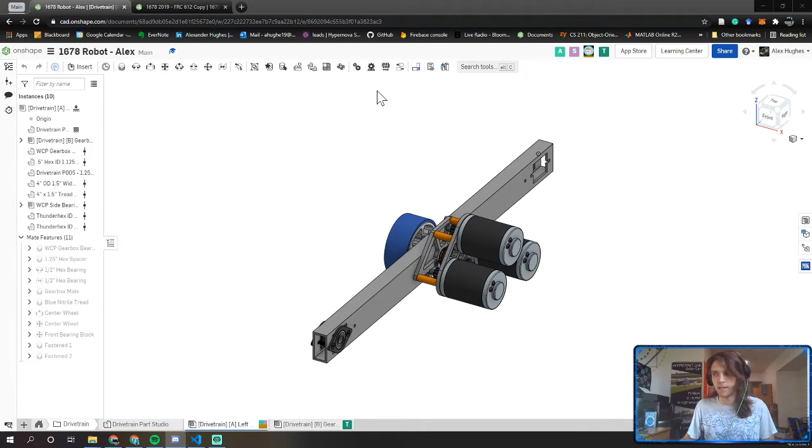Yesterday all we did was we put on a 4-inch wheel from CAD. It was specifically the AndyMark 4175 wheel, and we just fit that onto the end of the gearbox shaft, and then we shortened the shaft until it was almost flush. We gave it, I think, 5/1000 of an inch tolerance.

So we added the wheel, we shortened the shaft, and then we grabbed one of the West Coast Products side bearing blocks from CAD, and we inserted that into one of the slots that we made on the bar previously. So this is now, I think, the fifth meeting or so, fourth or fifth.

Hopefully by this point, you all are kind of getting into the vibe of how FIRST robots are CAD'd. Just inserting and mating, that's the majority of it. So I'm going to start moving slightly faster.

My goal today is for us to get this drive rail completely finished with all the wheels and sensors and everything. I want to get to this point basically. I want to have everything except for the belly pan components and the bumpers.

Save that for next time, but I really want to have the drivetrain fully laid out within the next hour, 30 minutes, and then we'll talk a little bit about what we want to do going forward, because obviously we'll finish this robot up over the next couple weeks, but then I want to talk about other plans, things that we could work on over the summer and possibly into the fall. But we'll save that for the end of the meeting.

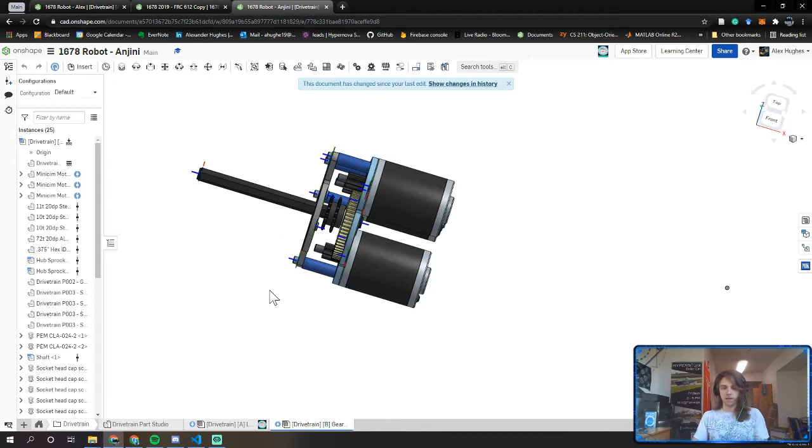Okay, turn off those icons by hitting K on my keyboard. So I'm going to check interference, include standard content. So you're going to get several interferences. The interference with the PEM nuts, those are expected. Interference with the bolts, those are trivial.

So you're getting an interference with the top of one of your bolts here. And you're getting an interference with your shaft, and that's one of the issues we troubleshooted last time. That took a little while. But let's go ahead and figure out what's going on here with these bolts. So it looks like to me, I see the issue.

So we used the 72 tooth pocketed gear. The pocketed gear is wider on the outside and then gets thinner on the inside. You're using just a standard flat gear.

So what you need to do is you need to go into CAD, pull up a pocketed 72 tooth gear, which sadly do not come in steel varieties. You have to pull down. You want, here it is, 72 tooth 20 DP aluminum half-inch hex bore pocketed gear, or WCP-0123. That is the part number. And you'll want to switch that around. And then once that is in, that should fix most of your interferences.

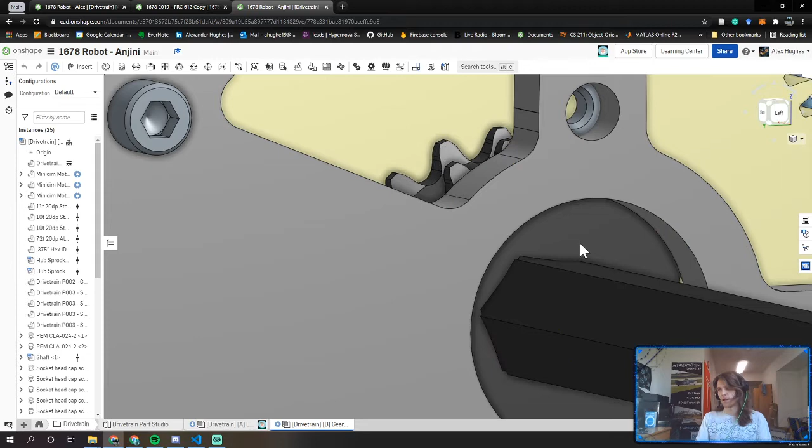But what I would recommend doing is fixing some of your mates, like say the mates where all of these parts fit onto the shaft. You'll want to mate them so they always face the same part of the shaft.

So what you could do is, this is obviously like a revolute mate, but you could do a revolute mate and then also do a parallel mate between one of the flat sides of your sprocket, the inside of your sprocket, with the flat side of your shaft, and that would keep those two parts strongly together. So your shaft and your gears would always rotate as one.

But again, it's a trivial error because it doesn't pop up in real life. It only pops up in CAD. And if you have other errors, we could fix them later. Other questions?

When the document says that there are newer versions of linked documents available, do we need to do anything about that? It's typically best to just update all of your instances to the latest version. So you'll see a refresh icon in your upper left, right by the insert icon. If you just hit that, you can update all of your documents. It almost never will interfere with anything. It just kind of gets rid of those annoying update icons that appear.

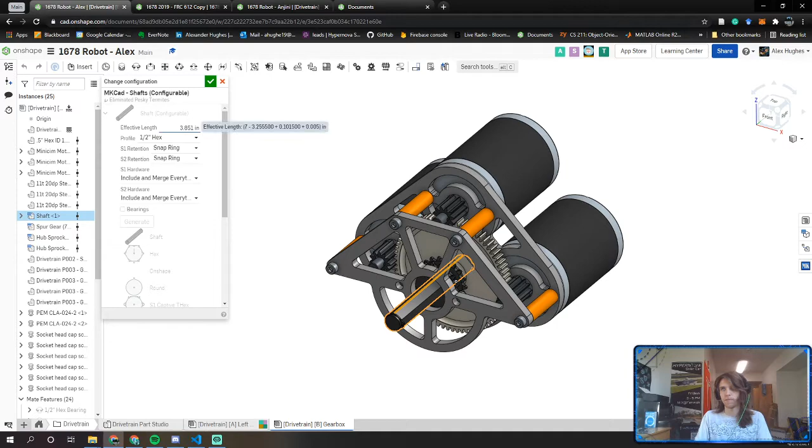Okay, cool. So yeah, unless there's any other questions, we will go ahead and get started with adding the front wheels. I'm just gonna hide some of this stuff.

Were the bearing blocks annoying for any other people with the interferences, or was it supposed to be like that? No, it was me too. Okay. Wait, were you all having troubles with the bearing blocks getting them together, or not? No, the screws are just annoying.

Yeah, so it comes with special screws, which is slightly frustrating. It doesn't necessarily come with the ones that you can pull up in standard content. So yeah, I don't know why the ones I pulled up came pre-assembled in MKCAD. That just might be me having the advantage of having the app with more updated things that might be on the ones you're using.

If you search it up, you can find the fully assembled bearing block. That's what I did. I can also just go to your document and pull up the linked document to that exact one. Oh yeah, I forgot about that. If you just want to pull it off of my assembly, feel free.

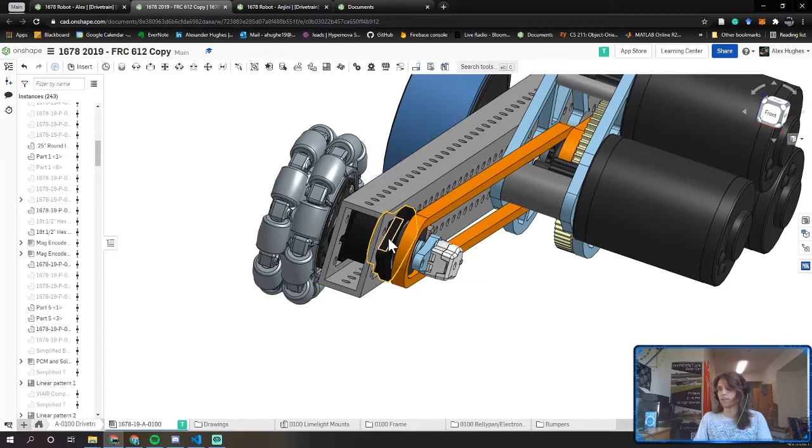So first thing that we need to do is we need to add a shaft. I talked about this last time, but what we're going to do for this front one is add a Thunderhex shaft. So we need to go into MKCAD, find where the shafts are, shafts configurable, and go to hex/Thunderhex. When I choose the 1/2 inch, we want to hit the check mark on Thunderhex, and let's insert a random length of, let's say, 5 inches. So: MKCAD, shafts configurable, add a 1/2 inch Thunderhex, 5 inch length piece of hex shaft.

Actually, that might not be the best thing to do. How did we do this, trying to remember... oh yeah, okay. I lied, don't add in the hex/thunderhex. We want to just go to shafts configurable because that will allow us to add in the automatic retention methods, which is the exact same thing we did on the gearbox.

So if we use the standard shafts configurable, we want to choose a 1/2 inch hex profile. We're going to say the effective length will be 5 inches. We're going to do snap rings for both of them, include and merge everything. We're not going to bother adding the bearings, and we're just going to insert. That's going to give us a shaft basically identical to the one that we used on the gearbox, other than this is a thunderhex profile, while the gearbox shaft was a standard hex profile.

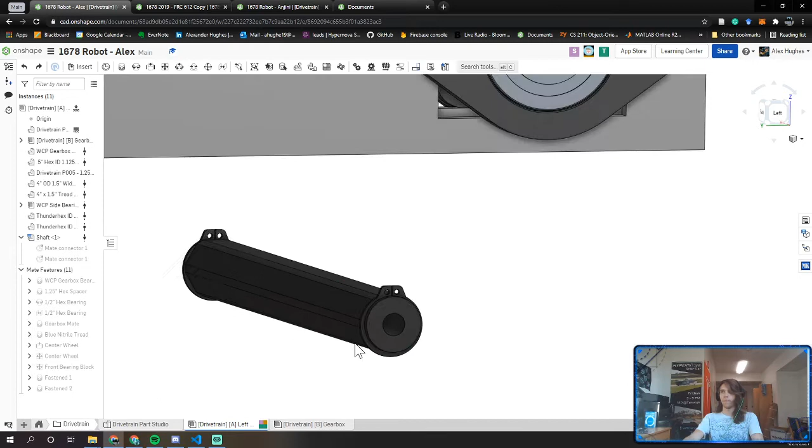But basically, the difference between a thunderhex shaft and a regular hex shaft is a thunderhex shaft is a hex shaft, but its corners are rounded. And the corners of the hex are rounded in such a way that it allows it to fit into a circular bearing called a thunderhex bearing. So we can insert this piece of thunderhex shaft into a round bearing, which means we can insert it in any orientation.

The advantage of that is you do not have to go through the painstaking process of trying to insert a hex-shaped profile through two hex bearings, which if you've ever tried replacing a piece of hex shaft on a robot and had to go through multiple hex bearings, it can be quite a pain to do, especially if your robot's already assembled and you have a bunch of stuff in your way. So thunderhex shafts just kind of make things easier.

They also come drilled out, so you could tap the ends to a quarter-20 or quarter-28 tap, and thread things into the end, which is a useful feature. That's how I typically do retainment - we'll just tap the ends and add a bolt and a washer. But snap rings are a little bit cleaner.

So we have our hex shaft. Sorry, I need to rename these mate features quickly. Those are the thunder hex bearings that we added last time. Bearings.

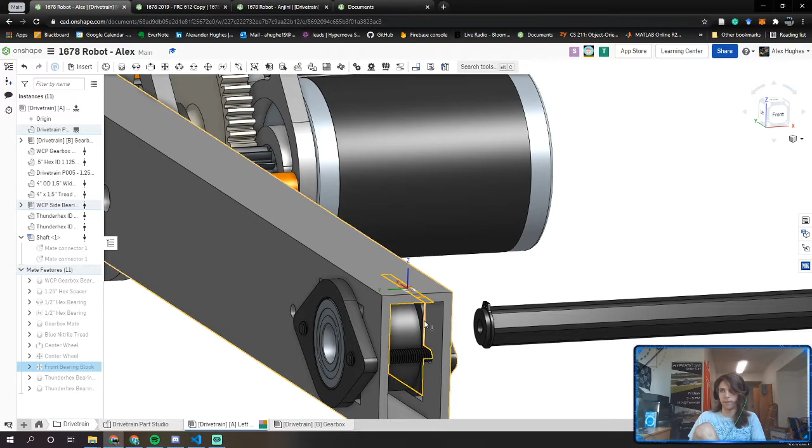Alex, which parts of the side bearing block did you mate to the left drive rail? So what I did is I did a planar mate - I took the top face of, I'll make this transparent quickly, the inner square on one of the sides of the bearing block, and did a parallel mate to the top face of the cutout that we made. Then with that parallel mate, you just have to make it so it can only go left and right by about a tenth of an inch in each direction, and everything else should be zero. Okay, thanks.

Okay, so we have the hex shaft. Let us go ahead and drop in our wheel. Just go ahead and get everything that we need. So we have our hex shaft. Let's go back into MKCAD, and we're going to find a 4-inch Omni wheel. Hopefully something that comes completely pre-assembled.

So in MKCAD, verify - they use the 4-inch Vex Pro Omni wheels, which have a part number of 217-2584. So I'm looking for 2584 here in MKCAD. Great, if I could find that. Omni wheel - it's there if you search for it. It might be easier to just search. 217-2584.

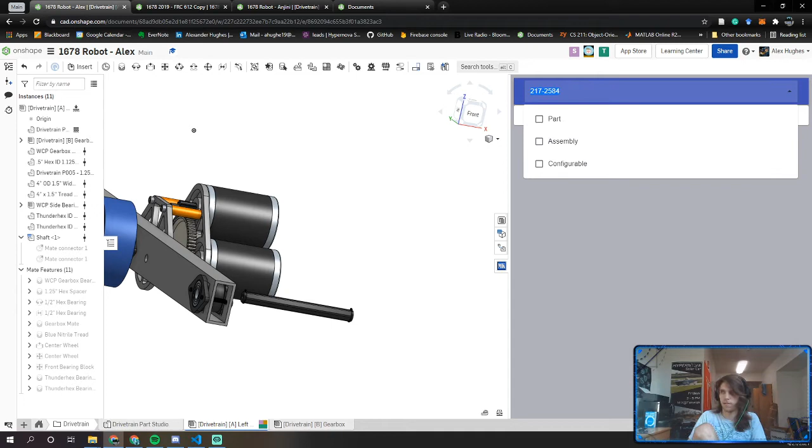Parts, might be in... I don't know. Gonna search that. No, apparently the Onshape, whatever - this app still apparently has glitches. I could find it quickly, manually. Can't. Being blind.

It's called deprecated 4-inch Vex Pro. Oh, it's one of the deprecated ones. Might not have that in my little app here. Okay, well I'm gonna just search for it using the old MKCAD, the one you all are using. Wheels, 217-2584. Yep, okay, here we go. So deprecated just means there's a newer version out there - slight improvements, so VexPro can sell you more stuff.

So we're gonna take that, drop that down. It does not come fully assembled, which is slightly annoying. What we're gonna need is we're gonna need two - the heck, yeah, we typically need two hubs, but looks like Team 1678 only uses a single hub.

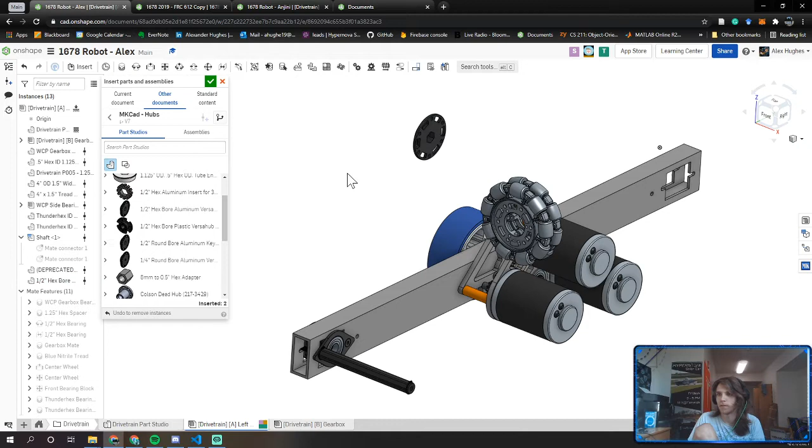There's a separate folder for hubs. Oh, really? I must have completely forgot about that. Here we are, you are right. MKCAD hubs - we want to add in the half-inch aluminum hex bore Versa hub, which is part number 2592. Some of you all might remember these from Rosie - we had to use these on Rosie's wheels, and I really did not like them.

But such is that. So these simply mate onto - I'll kind of demonstrate this here. What you'll do is the hubs just kind of interlock with the little... go. Well, if I get the orientation right, hubs will interlock with these little rectangular-ish parts, and then you run screws all the way through, and bolt it to the other side. So it takes a circular hub inside the wheel and turns that into a hex shaft, or hex profile, so you can run a hex shaft through it.

So we need one Omni wheel, we need one half-inch hex hub, we need one piece of Thunderhex with shaft retention. What else do we need? Well, we're going to need a sprocket. So what is this? This is an 18-tooth, half-inch hex bore, 25-chain sprocket. So we are looking for Vex number 3488. Go ahead and pull that up.

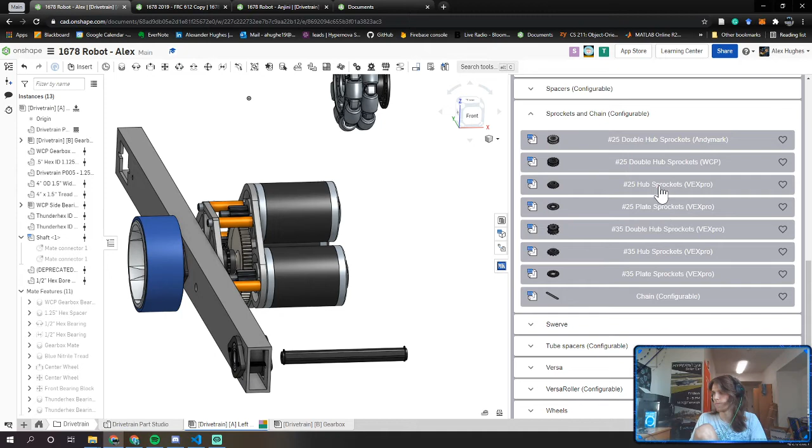Have to go down to sprockets and chain. I will choose the configurable hub sprocket - that just makes my life easier. Half-inch hex bore, 18 teeth. And that's that, I'll drag that over here. Spin it in. Which one did you select?

Sorry, what was that? The option that you just did for the sprocket. I'll drop them in chat, but it was 18-tooth, half-inch hex bore, number 25 hub sprocket. It was part number 217-3488.

And then finally, we have what looks like a mag encoder. Yeah, mag encoder with magnet. They have a mag encoder with some sort of special adapter for it. So let's see if we can figure out that. I should have spent the time figuring out how that works, but I just haven't.

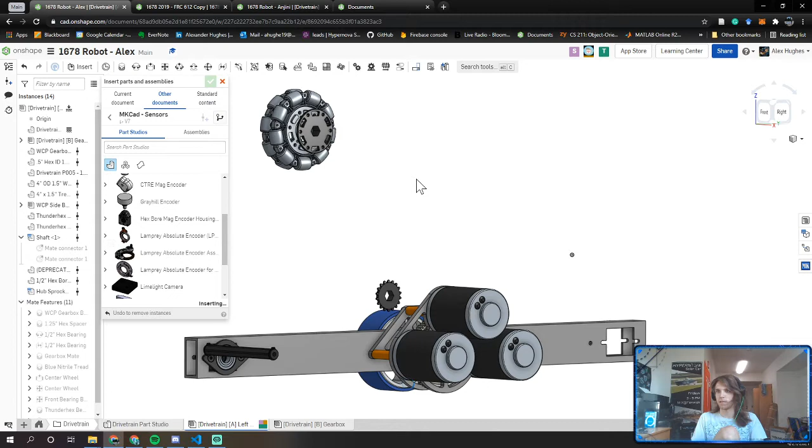This app sucks. It doesn't have sensors. Other documents, MKCAD. Going down to sensors. Here we are. To the mag encoder. Grayhill. Yo, that's pretty neat. That might be useful. CTRE mag encoder. That's what I want.

This looks interesting. This thing I've never seen before. Oh no, it's not an assembly. It just comes apart. That's awful. This looks like an all-in-one solution, so you don't have to do what 1678 did here and mount your own little machined bracket thing. We might not even bother with a mag encoder because they clearly left out some CAD details that I don't want to bother to figure out right now.

Does that just count wheel rotations? Yes, exactly. This will tell you how far your robot realistically moves. This is in comparison to putting your encoder on your gearbox, which a lot of teams do instead. But it's clear that 1678 did not design their encoder in there. And it's also kind of better to put your encoder further down the line because it gives you a more

accurate measurement. I'm just going to delete the encoder for right now because I don't want to worry about that. We could go back in and add that later. Let's get the important stuff out of the way first. Okay, so we have four things. We have the hub, we have the wheel, we have the sprocket, and we have the axle.

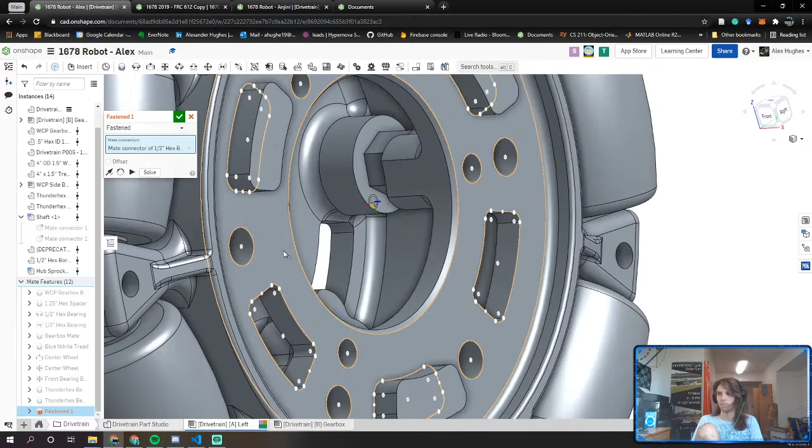So the first thing I'm going to do is mate the hub into the wheel. The way I'm going to do that is a simple fasten mate from the face of this hub into the face of the wheel. And you might want to go into the offset here and change the rotation angle around Z. For some reason, it defaults to rotate around X, though I've never used that. I've always rotated around Z.

I'm just going to change the rotation angle until it matches up with these little squiggly rectangles on the wheel. I'm gonna do 30, 35 degrees. I'm just gonna try and hone that in. 40 degrees. So for me, it's about 40 degrees to get those rectangles to fit inside the hub, which is realistically how it would work. So I'm going to name this half-inch hex Versa hub. And that's precisely how your hub fits on.

Then I don't know if these things are actually threaded all the way through. Let me actually look that up. 217-2592 hub, Versa hub. Because you might just be able, no, those are smooth. So those are through holes. They are,

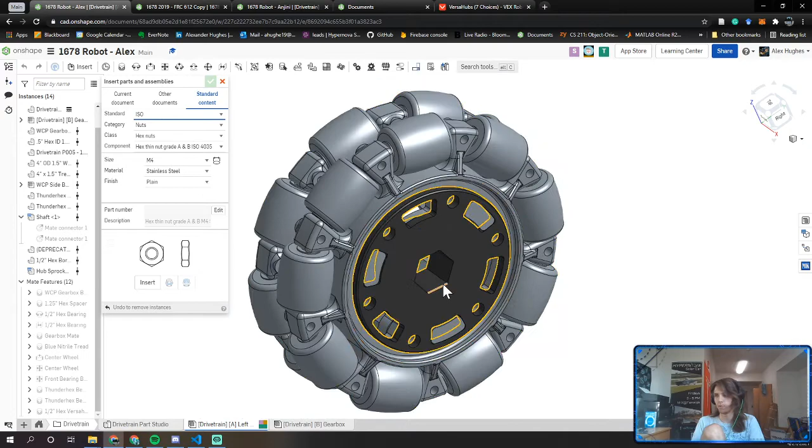So I want to grab a few bolts and run bolts across this thing. So I will need some bolts that are at least 1¼ inch long. So I'm going to go into standard content. I'm going to grab some number 8. Let's do number 8-32 because that's pretty standard. What type of bolt do I want? Let us do a round head. No, not round head. We just machine. Hex head machine screw? No.

Screw it. We'll just do socket head cap screw. Kind of the standard. Actually, yeah, socket head cap screw with the button head screw type. My personal favorite type of screw. So we want to do a number 8-32. Also, that doesn't matter. You can use whatever screw you want. We're going to choose the 1.25 inch length. I'm just going to drop 3.

And in case you didn't know, if you just click on the parts where you want the mate to occur, so if I just click on 3 of these outer circles and I hit insert, it should automatically insert those screws all the way through. Oh, it did it, but it did it the wrong way, which is ever so slightly annoying. I need to go in here and flip all of these by hitting the flip primary axis, and I'm also just going to name them number 8-32 1.25 inch, just so I could keep track of what mates where.

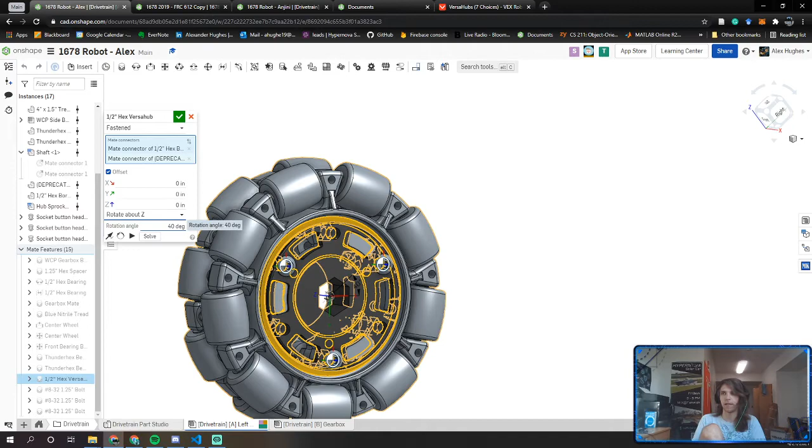How did you exactly align the Omni wheels' face with, I forgot the part name, with the black part? The hub? Yeah. So in the mate itself, you have to go to offset. You have to hit the little offset square, and then you change your rotation to rotate about Z. And then I just kind of incremented that angle until it finally fit. For me, it was 40 degrees. It might be the same for all of you.

Okay, so we have our bolts through, and obviously whenever you have bolts, you need nuts. So we are going to go into ANSI inch. What type of nuts do I want? Let's just do standard hex nuts. I'm not going to bother too much right now with it. 8-32, obviously, and we want to click on the little edges where we want those nuts to go. Holy crap, those are huge. Why did it do that? For some reason it inserted 7/16, so I want to edit my standard configuration, fix that.

Oh, that's interesting. For some reason I can't choose those type of nuts. Let's try that again. Round 2. Hex nut, hex nut. Okay, apparently they don't allow hex nuts to go that small. Maybe machine screw nuts. 8-32. Okay, here we go. Click on those 3 circles where I want this to be inserted. These are a little overkill. Kind of annoys me how big they are, but they look good enough.

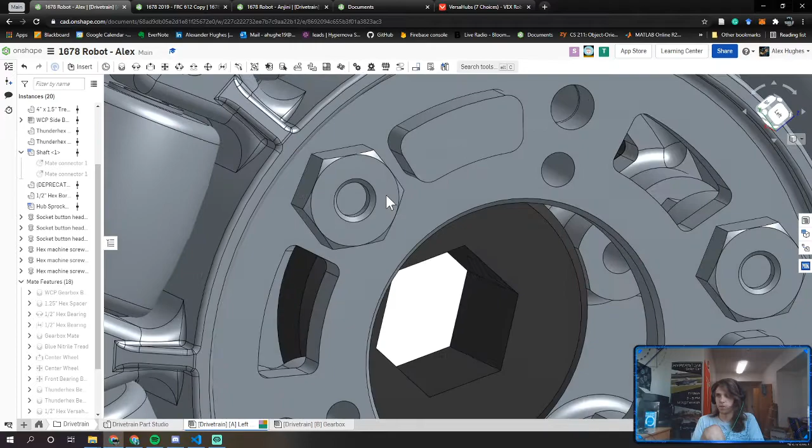Now, realistically, you don't actually get much grip on these. As you notice, the bolt actually doesn't come all the way out to the other side. So I might actually consider increasing the length of these bolts ever so slightly. Whatever the next size up is, 1.375, so 1/8 of an inch longer. That's just going to give them a little more grip so your wheel doesn't come flying apart. And then I'm going to rename those fasten mates, which are 8-32 hex nuts. Again, so I can keep track of everything. Okay, cool. Any questions about assembling this wheel?

What did you end up making the nut properties to be? It doesn't really matter, but let us see specifically what the configuration was. As long as the size is the same as the screw you used, so 8-32, and then I just chose machine screw nuts, and I chose the hex machine screw nut.

So I just came in. Sorry if I'm a little late, but I haven't really gotten to do the Onshape certification course yet. Do you want me to leave this meeting right now and just go do the certification course and get that done as soon as possible? No, if you want to stay here and actually do this CAD with us, you can. Just know that I can't slow down to cover certain topics that might be covered in the CAD certification course. If you feel comfortable with what we've done so far, feel free to. But if you are very confused, it might be best to go work on that. But stay if you want.

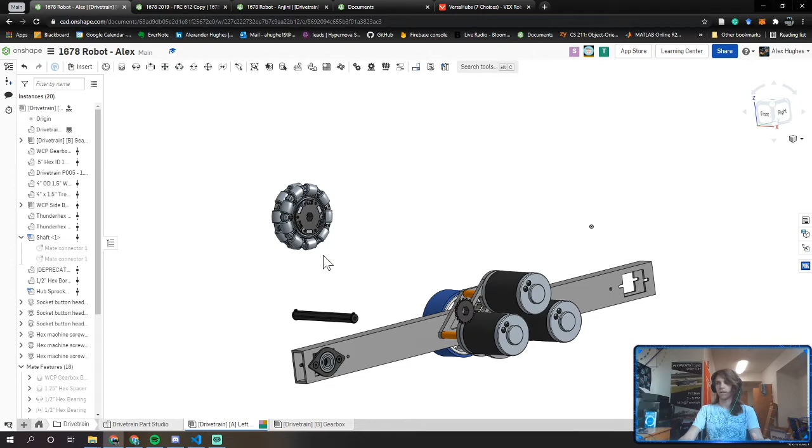All right. So one quick thing I'm going to do is, for the sake of keeping instances and assemblies clean, one of the things I mentioned in my very first presentation was you should never really have more than 25 instances per assembly. We're about halfway through, but we're already at 20 instances. And so this wheel has 8 parts to it, but it's just a simple wheel.

So for the sake of keeping everything clean and making our lives easier, I'm going to highlight everything that we just made for this wheel. If you right click on all of that in your feature list and hit move to new subassembly, in your main document it will create a brand new assembly called assembly 1. And I could drop that assembly into my drivetrain folder and rename it. So this would be a drivetrain level assembly. It is currently one assembly lower than the left drive rail, which is an A level assembly, so this would be a B level assembly. And I'm going to call this 4-inch Omni wheel.

Now if I go back to my original assembly, my left drive rail, instead of having 20 instances, now I only have 13. One of which is now an assembly that contains 8 instances inside of it and all of those features. So it just keeps everything nice and clean.

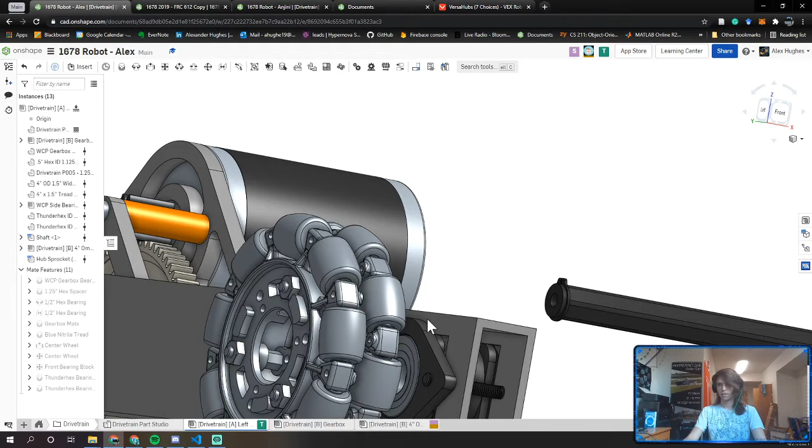And so next what I want to do is, give me a second, I'm trying to figure out something. I really wonder if they just didn't add a hub on the other side. This annoys me because I've never seen a team do this, but it might be. You don't really need to support the shaft on the other side. You just have to worry about it possibly sliding, but it really shouldn't. I'm just going to copy what 1678 has in their CAD for right now.

So what I want to do now is I want to have this hex shaft go into the hex hub that we have here. The way I'm going to do that is I'm going to do a 2-step mate again. The first thing I'm going to do, I'm going to do a slider mate, because this hex shaft should theoretically be able to move around inside of this hub. It should be able to slide back and forth along the hub, and it should also be able to rotate with the wheel.

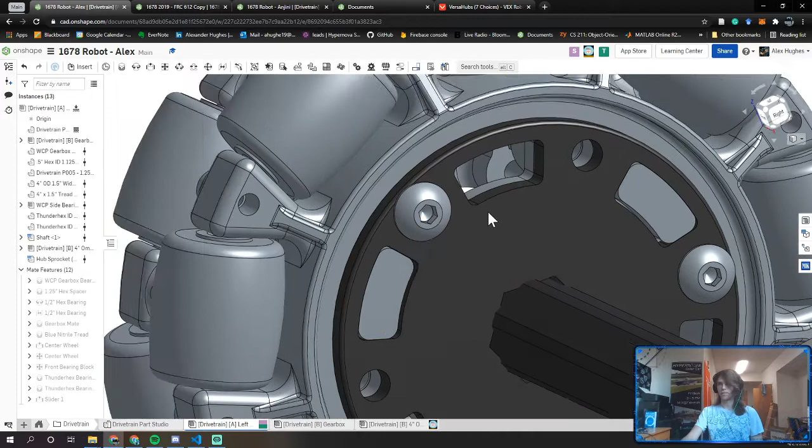So I'm going to do a slider mate there, and then in order to get the wheel and the shaft to line up, because currently, as you can see, you have interferences between the two, I am going to do a second set of mates, a parallel mate. A parallel mate between one of the flat planes on the piece of Thunderhex and one of the flat planes inside of the Hex Hub.

So what that means now is if I, say, fix the wheel in place, the shaft now doesn't spin with respect to the hub. It can only slide back and forth, which is very useful for us. Because now whenever I do interference checks, you do not have any issues with that, as we saw with Anjini's and lots of other people's issues previously.

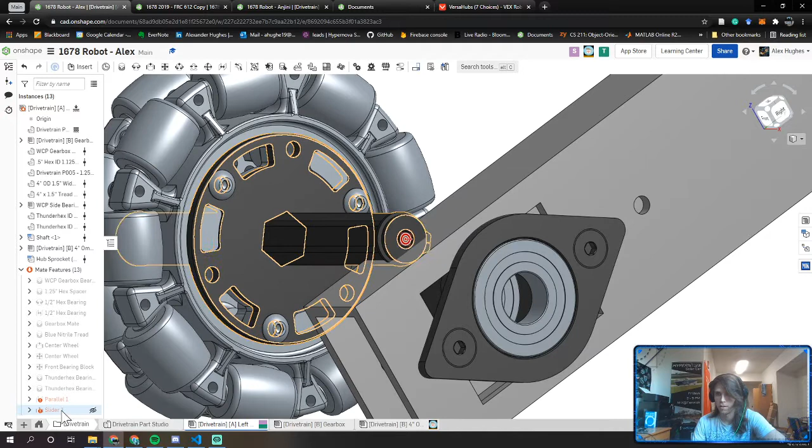Giving me an error. Figure out why. A second. Why are you giving me an error? Shouldn't be. Yeah, I've rearranged the order of these. Oh, yeah. I should have been doing a cylindrical mate. That is my bad. I'm still learning Onshape mates. I don't use those quite frequently.

Frequently enough, at least. Okay, so now that it's oriented correctly, the issue that I was having is a slider mate only has 1 degree of freedom, which is that one axis that is able to move along. And so I was doing a slider mate, and then I was telling it that it needs to rotate in order to be parallel with another surface. And it did not like that because I was telling it to rotate in a degree of freedom that the slider mate already defined.

So if you do the parallel mate first, so you get them to line up, and then you add in your slider mate, everything's fine. But if you do them out of order, you could get an error. If that makes sense. It does, it might not. I don't know if I'm making sense when I give these CAD lectures. Questions? Anyone?

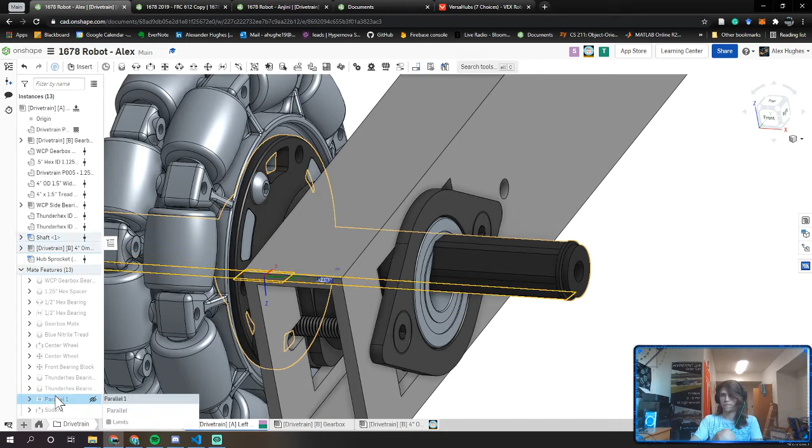Cool, and we'll continue. So we have our hex shaft mated onto our wheel. So now we need to mate the hex shaft into our bearing block. And I'm going to do that using a single cylindrical mate. Well, first off, actually I need to rename those mates that I just made. I'm going to rename the parallel to be front axle, slider, same thing.

I am going to add now a cylindrical mate, the end of one of the shaft to the center of the bearing. That should give me plenty of degrees of freedom. Yes, that gives me plenty of degrees of freedom, but it keeps it anchored where I want it to.

I just realized I named these wrong. This should actually be front wheel. The two mates we just did should be front wheel, and this mate that we just did should be front axle, if I'm keeping with a consistent naming convention.

I really should standardize how I name sketches and, not assemblies, we've standardized assembly naming, but mates and whatnot. That might make everything a whole lot clearer. Doesn't matter too much right now. So we have everything approximately how we want it. As you could see, if you kind of move everything around, you should be able to get a bunch of play in your system. That will become more clearly defined here in a minute.

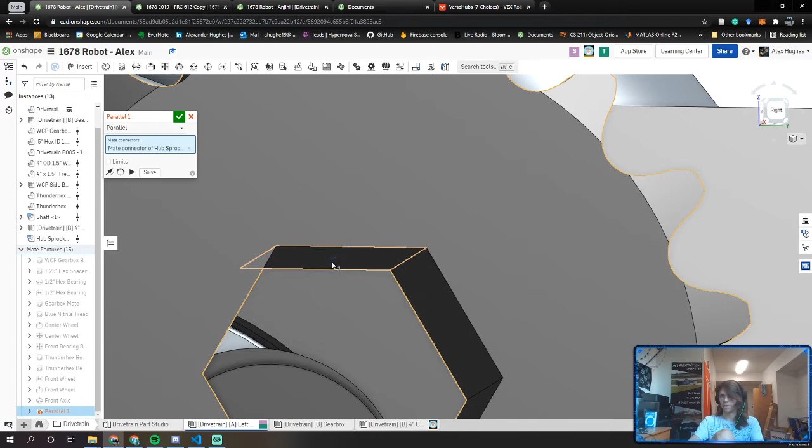So what I'm going to do now, we'll see if this works, but I'm going to do a two-part mate again, putting the sprocket onto the shaft. I'm going to do exactly what I did with the wheel. I'm going to start off with a parallel mate. I'm going to make one of these flat inside edges of the sprocket parallel to one of the flat surfaces of the hex shaft. I'm going to just rename that 18-tooth sprocket. Pull that guy out here.

So now that I have both of those parallel, I can then do a revolute mate. I want to do a revolute mate and push this all the way up against the bearing. The end of the sprocket should be touching the bearing. Sprocket. And now if I rotate all of these, they should all rotate together. Which, as we see, everything's kind of rotating as one, as it should be. Cool.

So if we did our math right, and I think we did, this sprocket should be perfectly in line with this sprocket on our gearbox, and that's because of that spacer we made previously. 1678 did that math for us. But now if I look at it from a front view, I can actually notice that the sprockets aren't perfectly aligned. There is a little bit of an offset between the two. Let me see if 1678 has that. No, theirs actually seem to be perfect. So there's an error somewhere in our assembly, but it's nothing we can't fix.

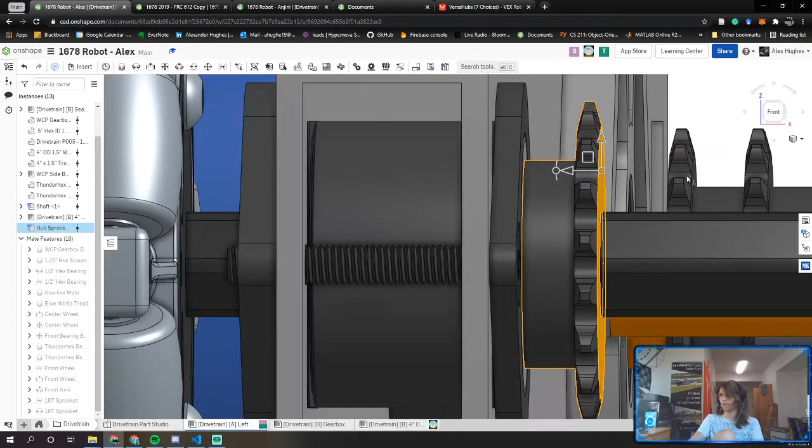So let's quantify how much these are offset by. I look at the outer face and, say, this face. So we are off by 0.062 inches, which is almost exactly 1/16 of an inch. So that makes me wonder if I added in a spacer somewhere that I shouldn't have. Check a few things quickly.

Troubleshooting in CAD is something that you will become very familiar with over robotics build season. I'm just going to check a few things. I'm going to check to make sure the distance between the bearing and the sprocket at the very front is the exact same on ours, and it is, within about 1/1000th of an inch. That is correct. What other sources of errors could we have?

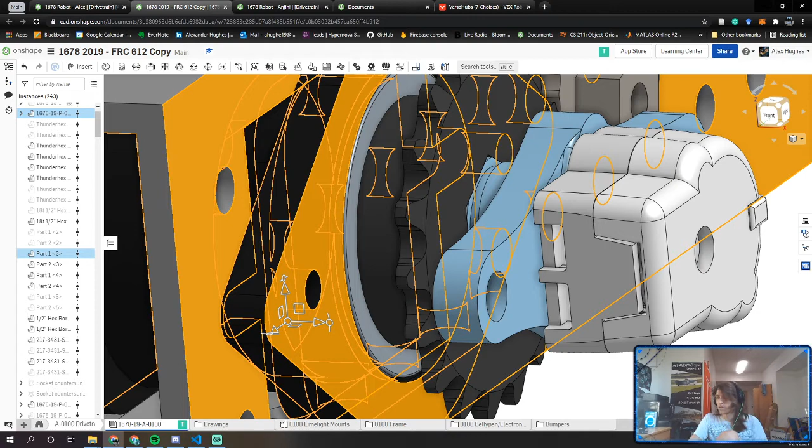Maybe is their sprocket sitting further off the drive shaft? Theirs is 0.54 inches away. Ours is 0.46 inches away. Interesting. So maybe is our West Coast Products side rail thinner? Ours is 1/8 of an inch. Theirs is not 1/8 of an inch, theirs is 3/16 of an inch. So that's why we have almost exactly 1/16 of an inch worth of error, because 1678 is using presumably older bearing blocks, which are 3/16 of an inch, while our newer bearing blocks are only 1/8 of an inch.

So we need to add a 1/16 inch spacer in between our sprocket and our bearing. So that's super easy to do. If we just go to MKCAD and we pull up spacers, we're going to do a VEX hex spacer. We want the spacer length to be 1/16 of an inch, which is 0.0625. Typically, I will go in and make my own spacers, but if there's something standardized, you could just insert it.

So I'm going to quickly delete the revolute mate that I made previously, pull that sprocket out of there, and then do the exact same thing with this spacer. I'm going to do a two-part mate. First one is a parallel mate between two surfaces, 1/16 inch spacer. Now it's stuck inside my assembly. Pull that out of there.

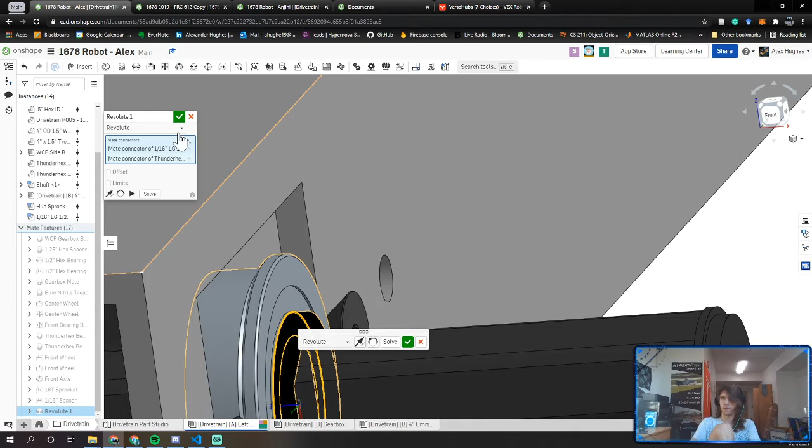Then I'm going to do a revolute mate between these, 1/16 inch spacer. And then I'm going to re-add that revolute mate I previously had on the sprocket to the 1/16 inch spacer.

And now the sprockets line up basically perfectly. Make this transparent. You can see they have about 1/1000th of an inch worth of offset. That's not going to be an error. I want to show all my instances so everything pops back up.

Cool. What spacer did you use again? I used a 1/16 inch hex spacer. Is that in a specific folder on MKCAD? Sorry, my Onshape is incredibly slow. There should be one. Yes, MKCAD spacers. Big fan of 3D printing your own spacers, but you know, you could also just insert them and make your life easy.

Actually, that's one of the things that we should probably do if we were actually CADing in the robotics season. One of the very first things you do when you start your CAD is, in the robot part studio, make a bunch of standard spacers. So we'll make our 1/16 inch, 1/8 inch, 1/4 inch, 1/2 inch, 1 inch, and design those with 3D printer tolerances so that as soon as kickoff happens, we could just start mass producing spacers that we know we're going to use on our robot.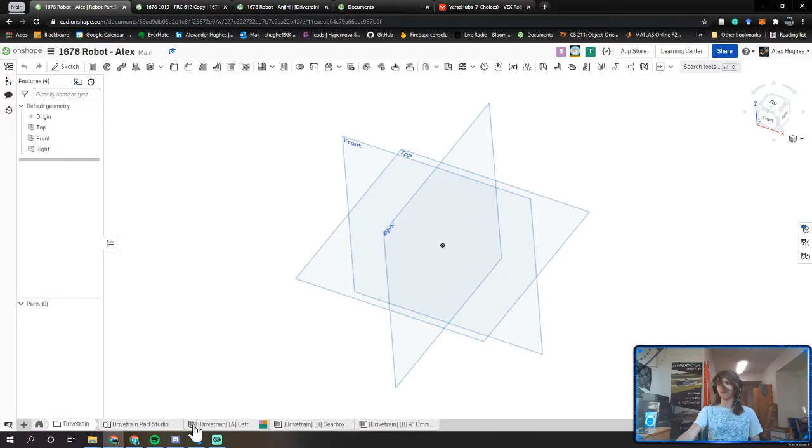And then we just insert those from the robot part studio into here. Because why would you buy a hex spacer when you could literally 3D print it for 1/100th of the cost? But we're not going to worry about that for this CAD model. Cool. So hopefully all of you should be at this point where you have something like this. Kind of wiggly, kind of glitchy. I don't know why my hex shaft is glitching out every time I do this,

but everything should be at least rotating together. So the final change that I am going to make is I'm going to put some sort of spacer in between the wheel and the outside of the bearing block. So 1678 here uses a 3/16 inch spacer. So we shall do the same.

So I'm going to go into MKCAD again, go to spacers, go VEX hex spacers, find, they don't have, how dare they? Okay, we're going to have to do our own custom nylon spacer. We can't do that either because those don't come in a hex profile. We're going to have to make our own spacer here. Fun. You'll have to do this hundreds of times over your FRC CAD careers.

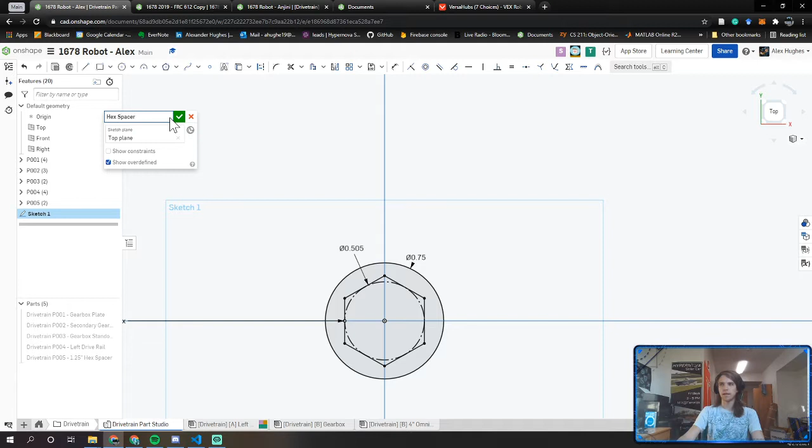Inner diameter of 0.505 to account for 3D printer tolerances. Outer diameter should be about 3/4 of an inch, 0.75. Just name that hex spacer profile sketch, and we're going to extrude that thing by 3/16. I'm going to throw those all into a new folder. I'm going to rename that as drivetrain part 006, 3/16 inch hex spacer.

And then obviously whenever we create a new part, we have to edit its properties. So the most important thing is we assign its material to PLA. And we could change its appearance to something that's not hideous, like the bright orange it gave us. Okay, cool. So once you have your hex spacer, you're just going to insert that, and you're going to do what we've done countless times now.

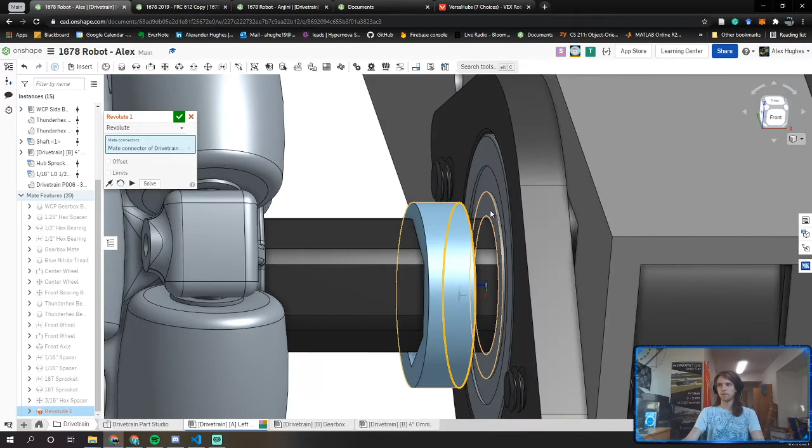That gives me an error. Let me back up here a second. I did something that Onshape didn't like. I'm going to hit Control-Z a few times. Try and understand what. Oh, I see what I did. I did a planar mate. I should have done a parallel mate. Planar mates and parallel mates, not the same.

One last time. Revolute mate between the spacer and the bearing. Okay. And a revolute mate between the wheel and... Actually, that doesn't need to be a revolute mate. That can actually just be a fasten mate.

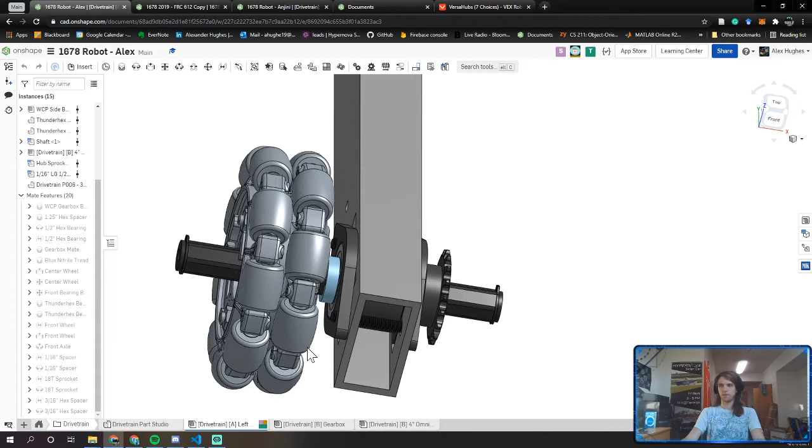Okay, it doesn't like that. So it's sliding this way, and I don't want it to slide that way anymore. Best sort of mate to do - it doesn't like the fact that I did a parallel mate. If I just go back to using a revolute mate. Sometimes mating in Onshape is just trial and error. You get something that does what you want. Okay, there we go, just a revolute mate.

And very quickly, I'll demonstrate - all we have to do now is shorten the shaft. So what I'm going to do is do a planar mate from the end of the shaft to this sprocket, so I have the C-clip flush up against the sprocket.

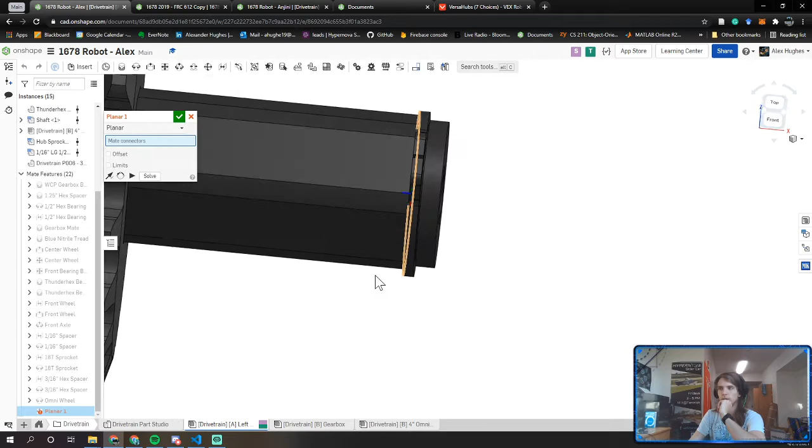Yeah, just need to put those two ends together and not worry about any of the other constraints.

What mate did you use to connect the wheel or make the wheel not pull out of the shaft? Because my wheel is coming, so I used a revolute mate to pin it, push the wheel all the way to the - what should we call this thing - spacer, sorry. Okay.

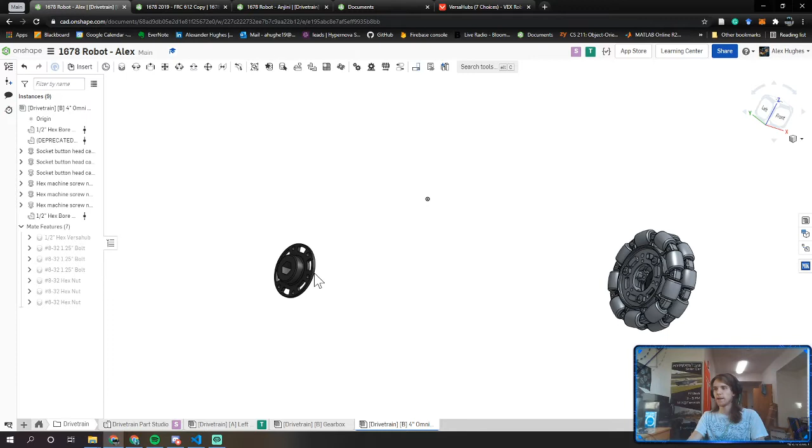One of the concerns I have is how the heck does - okay, yeah, we're gonna have to make a modification to 1678's design because I really don't like that. If I go over here into the Omni wheel assembly we created, all I'm gonna do is duplicate the hub and add a hub to the other side. Because if I'm looking at 1678's robot, there's nothing that stops this wheel from sliding to the end of this axle. So it just makes me think that either they forgot to CAD that in, or maybe when they imported their assembly into Onshape, it might have somehow gotten deleted. But what I want is another hub here so that the wheel has something to retain itself against, basically. So inside that assembly we made for the Omni wheel, I'm just gonna duplicate the hub

to mate it against. We're gonna have to delete some of those bolts that we made already. First, I'm just gonna mate the hex VersaHub. We did the exact same thing we did last time, which is try and get everything to line up nicely, which hopefully it will.

Do a 20-degree offset that time, things line up nicely. I'm going to delete the - actually, I'm not going to delete the hex nuts, but I'm going to redo their mate connectors, so they're now mating onto the Versa hub here. Oh, not what I want to do. This last one.

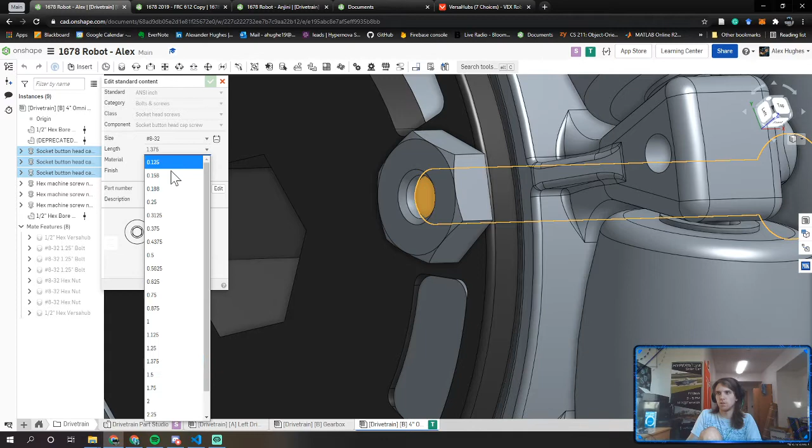Okay, so now we have a fully completed Omni wheel. This makes me a lot more comfortable, other than the fact that the screws again need to be slightly longer because they are not going through the nut completely. I'm just going to change their standard configuration to just the next size up, which is 1.5 inches. Update all of those. There we go. Now this is a much more solid Omni wheel assembly. And if we go back to the other side, now we have something to retain the other end of the shaft against.

So what we can do now is we can shorten this shaft to whatever length we need. So we have an effective length of 5 inches. We have a spare of approximately 1.7815.

I copy that, I'm gonna just make sure the distance is 1.7815. Okay, so what I could do is right click on that shaft, change the configuration, put the effective length in parentheses, track that number, and then I'm going to add in a tolerance of 5 thousandths of an inch, because you always need machining tolerances whenever you're machining something. If I generate that,

there we go, now we can see our clip is almost on the end. You have a tiny bit of tolerance, so whoever's using the lathe doesn't mess it up. But that is how you add a wheel to a drive shaft. As you can see, everything spins and it moves back and forth just like it should.

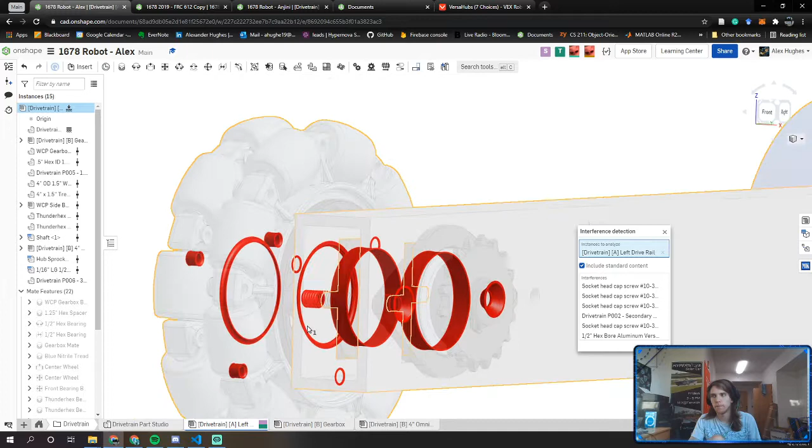Standard content interference shouldn't be happening. Nope, okay, everything's good. So I'll assume you all are good and we can move on. Last words or objections before we continue? I'm going to just watch and catch up later since there are a lot of people on calls on my internet and my onshape isn't handling it well. Cool, that means I can go faster.

Final things we're going to do: first off, we need a cam. Cams are very useful, so if we go into MKCad and go to Versa, we'll pull up the West Coast Products cam, which is down here at the very end, part number 3431. Cams are useful little features, they look kind of like Nautilus shells, and these will be the things that move our Omni wheel back and forth.

The West Coast Products cam is going to go in that hole we previously put on our wheel. So basically we want to do a revolute mate between the two, and I'll title that West Coast Products cam. That's going to allow it to spin, and as you can see if your block is over here on the left... okay, that wasn't a revolute mate, that was a fastened mate, my bad.

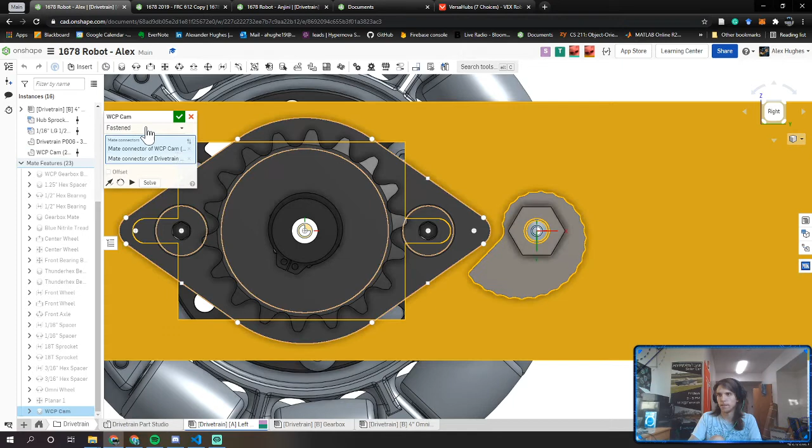As the cam spins around, it will eventually come in contact with your bearing block. So you could take a wrench or a hex tool and twist this further over, and as you twist it, it will push the bearing block to the left. That allows you to tension your chain. It's a very useful little trick.

Key thing with it is we need a bolt to go through it. So if I look up cam, it should tell me - I've included countless numbers of these in my assemblies and I still don't remember what bolt goes through it. It is a 10-32. So we need a bolt to go from one end to the other that is at least 1.5 inches long. I'm going to go standard content, 10-32, 1.5 inch, and insert it right here.

And then I need a nut to go along with it. Again, second, third - through all, yeah, so it's not threaded, just clarifying. Insert a nut onto the end. Great.

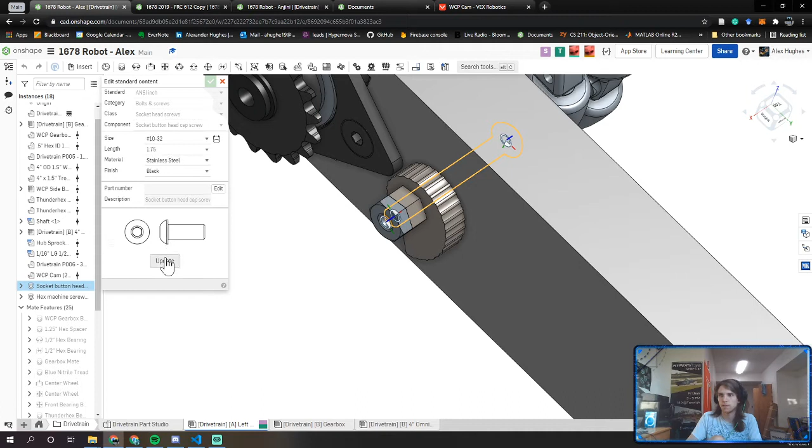And then I'm going to increase the sizes of this guy ever so slightly, editing the standard configuration instance. A little bit overkill, but it works. Hopefully that shouldn't get in the way of anything. Okay, just renaming those quickly - that is a 1.75 inch number 10-32 bolt, and that is a number 10-32 inch nut. Okay cool, that's basically it for this front wheel.

One thing I'm going to do now - I realize I'm starting to get a lot of instances, and actually no, I'm not going to bother doing it right now. I was going to turn this all into a single assembly, but we could do that later if need be, I'm just going to let it live for now. So now I want to add in the chain. If we go to MKCad, this is pretty cool - if we go to sprockets and chain configurable, we can add in some configurable chain.

So the two sprockets we have are, I'm pretty sure, both 18 tooth. Yep, 18 tooth chain, number 25 pitch.

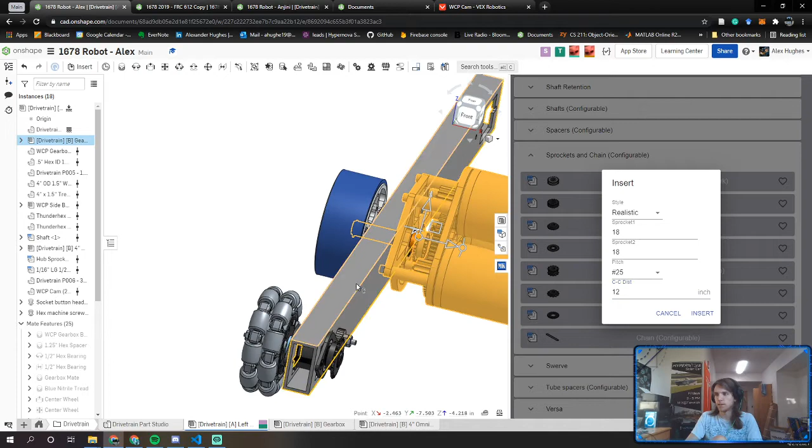And the center to center distance for us is going to be the distance between the two shafts. So if I click on both of these shafts, it should tell me a center to center distance. Oh, it doesn't. Let me try clicking the center of this shaft, or just click on the sprocket face, the distance between these two sprocket faces. Dang, it tells me a minimum distance. I don't want the minimum distance.

Okay, how about the center of this bearing to the center of this bearing? Okay, well, not being helpful right now. Screw it, you know what? We're gonna do it the manual way. We're gonna guess and check until we know what a good center to center distance is.

So sprockets, chain configurable, 18, number 25. We'll do 14 inches because our rail, actually no, let's do 12. Our rail is 28 inches long, so half of that would be 14, and we're obviously not all the way to the edge, so we'll do 12 inches. I'm going to do a realistic chain because that looks cool, and I'm going to insert that into the assembly.

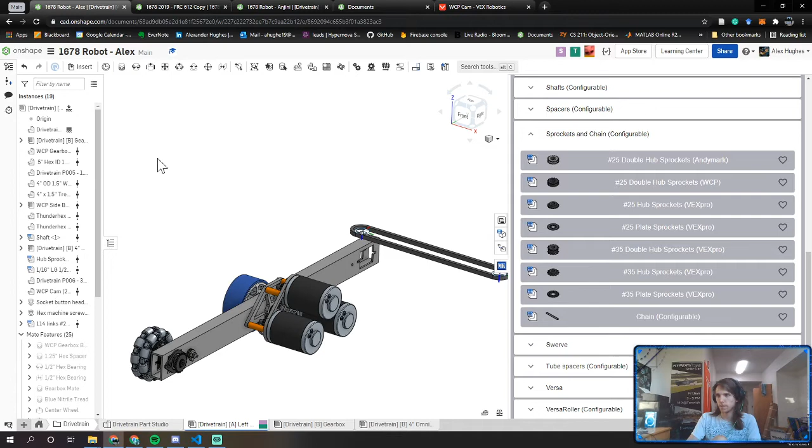Insert. There we go, didn't work the first time. Wait, inserted an unrealistic chain. I'm going to change the configuration to realistic. Generate. Okay, there we go.

So now we have a chain, and a chain that actually looks cool. So, you know, you don't have to do it. If you look at 1678's robot, they use the unrealistic chain model, but you know, it's pretty nice having a realistic looking chain. Makes your CAD model look more legit, you know.

So the way we are going to do this is it gives us the mating points, which is pretty nice, and we're just simply going to do 2 revolute mates between the centers of the 2 sprockets. I'm going to do a revolute mate between this mating point that it already gives me and the face of this sprocket. And it doesn't quite fit in. Maybe if I try the other side, here instead. Nope, still not quite.

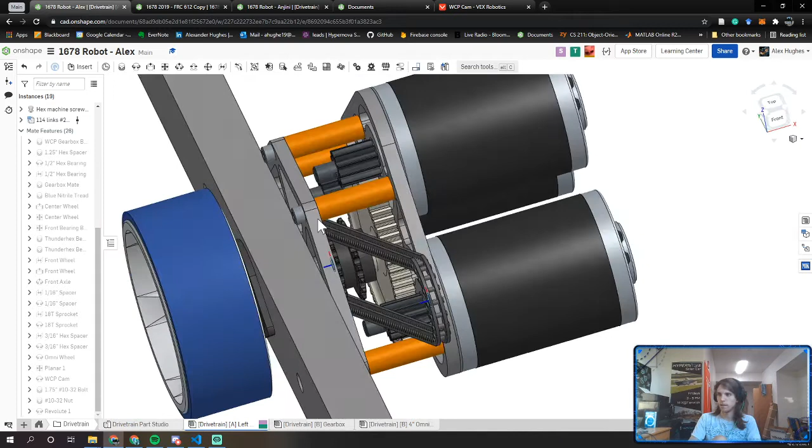As you can see, it's a little bit offset to the left. So what I could do is manually offset it by, let's say... wrong direction, 1 inch is too much, 0.05 inches. Yeah, that looks good. So if I offset it by 0.05 inches, that will give me a good looking connection.

Dan said he can't copy the workspace that I'm working on right now. Let me check something because it should allow you to duplicate it. Does it not allow you to copy it if I'm working on it, or can you just not copy it in general? I just can't copy it in general, but I think it might be, I'm not entirely sure. I can't copy it right now. Is it saying that? I have no option to right now. Oh, yeah, okay, let me try making it public.

Now that it's public, you might be able to copy it. Yeah, I got it. Okay, cool, hopefully that works. Just make sure you're not like... it might give you a... I don't know, Onshape's weird, and sometimes it'll give you like a workspace that's an identical copy, and we're editing the same document. So make sure it's your own document that you can edit without my interference. I think it's good. Okay, cool.

So now that we have a chain in here, and we look at how it is, we can notice that it doesn't quite fit onto the sprocket, so we want to change the length of this chain. One of the really cool things about this, by the way, is when you generate the center-to-center distance, it will actually tell you how many links are needed in the chain. So here it is 114 links. That's just something useful for the build team, they automatically know from the CAD how long the chain length needs to be.

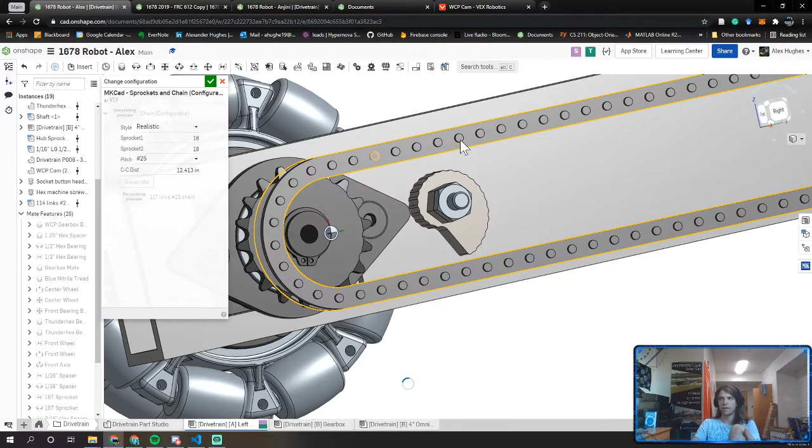Aiden says the center distance is 12.4125, so let's try that. 12.413. Generate. Obviously, at some point, the level of precision doesn't matter because adding or subtracting the chain will overshoot or undershoot a certain number. But it said we needed 3 more links, so we are at 117 links, and it looks just about perfect. And if we pull it all the way over here to the right, see, it fits in nice and well.

So what I want to do now is do a cylindrical mate, I think, that should give me the degrees of freedom I need. So if I do a cylindrical mate between you and you, just kind of the side of the sprocket, that should work. Yep, perfect.

Everything fits together nicely. Obviously, I can't actually get the chain to rotate with me, which is sad. But it even tensioned the whatchamacallit, it pulled the bearing block to the point that it needed to be.

So now the bearing block doesn't move to the left or right anymore. All it does is rotate. And now we have our first chain in. So I'm just going to quickly rename this to front chain. Hide those mates.

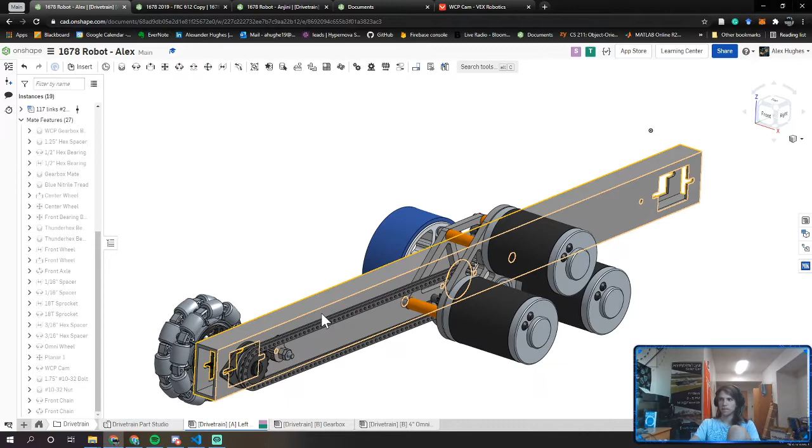We'll just let the cam spin. But that is our front wheel done, minus the encoder. We're not going to bother with that for right now. Any questions before I move on?

Because the second part of this is literally doing everything we just did for the back. So we have to repeat basically everything we did. The only difference is that we need to add a larger spacer for the back. Instead of this 16th inch spacer, we need to add like a half-inch spacer or whatever, the 16th inch plus the length of a sprocket. But do any of you have questions before we move on?

I have a question. Doesn't really relate to the CAD per se, but on the 1678 robot, is there a reason that the hubs are facing different directions for the front and the back wheel?

Not that I could think of. I think this is just a bad CAD model, honestly. Because they're using an aluminum hub back here. They're using a plastic hub up here. This plastic hub is not even mated correctly. And they're not even using a hub on the inside here. And they don't have a spacer, so this wheel is gonna scrape against this bearing block in order to rotate. Yeah, this is just a kind of bad CAD model.

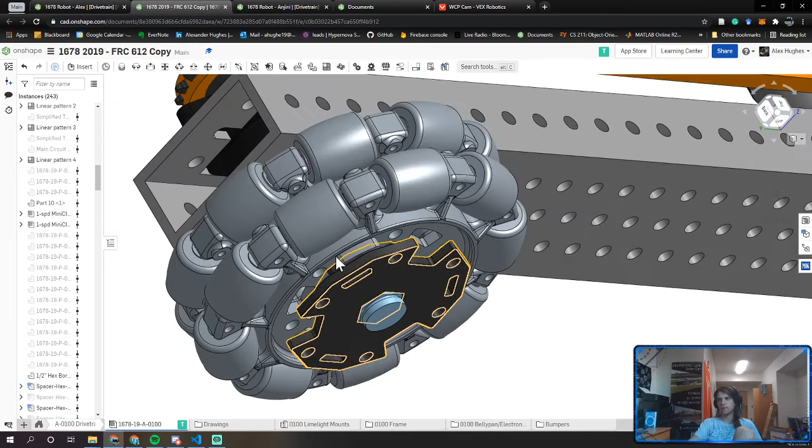This obviously isn't 1678's internal CAD. This might have been a rebuild from a new student or something. Because some of these errors are just not realistic. These are definitely things 1678 wouldn't make on their real robot. If they did, they wouldn't compete at the level they do. But yeah, that's just bad CAD practice, I guess.

Okay, so I guess we shall continue with the left drive rail. So what we are going to do now is basically copy everything we have over to this other side. And that should be relatively easy because we already made an assembly for the Omni wheel. So I want to copy the Omni wheel assembly and paste that.

Oh, okay, it just took a minute. So copy the Omni wheel. I want to copy the bearing block. Actually, do I want to do this? The question is, because the front wheel and the back wheel are so similar, I could just make an entire new sub-assembly of all of these parts and just reinsert it back here. But there are some changes that you have to make with the shaft and spacer, so it's not really gonna be worth it. So I'm just gonna copy the wheel assembly.

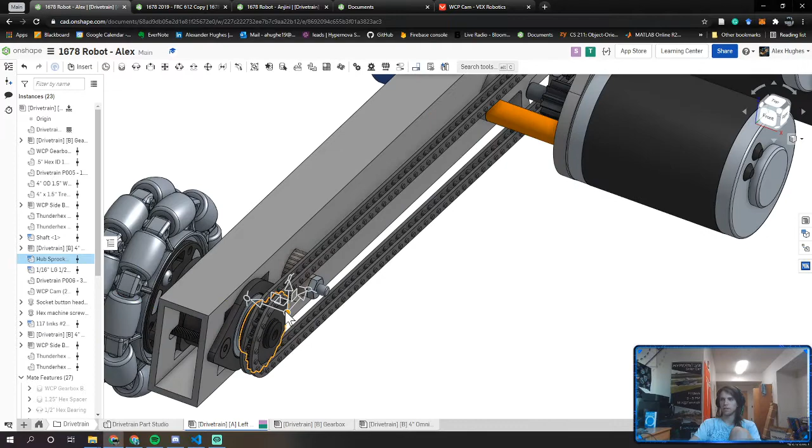I'm gonna copy this bearing block. I need the 2 Thunderhex bearings over here. Just kind of grab all my materials that I will need. Just gonna need this hub sprocket. I'm gonna need the cam. I'm gonna need a chain again. Same length of chain, so I'll go ahead and paste that over there. I'm gonna need a spacer. That over there. I think this is everything we will need.

So we're a little bit over the 25 instances I like per assembly, but you can't win them all. So now we're just gonna do exactly the same thing that we did yesterday and today, and just start assembling all these parts together. I'm gonna go through this pretty quickly, since we've already done this, but I'll explain it as I go.

I'm gonna start by inserting the Thunder Hex bearings into the bearing block. I'm going to just do a fasten mate there because technically the outside of the bearings does not rotate. The inside does. Wait, is that how I did that? Yeah. If I were using hex bearings, I would actually have them revolve so you don't have interference issues. But Thunder Hex, because they're circular, do not have those interference problems. I also need to copy this shaft over here.

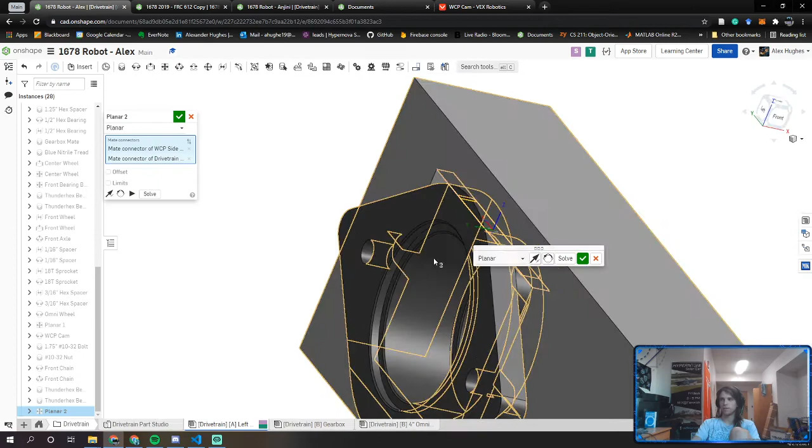So next I'm going to do a planar mate to get the bearing block inside of the drive rail. Just gonna mate the top face of that square inside the bearing block to the top face of the square that we cut out in the drive rail. And that's just going to be a planar mate.

What do I name this? This is going to be rear bearing block. I want to change the limits so it only moves in the X and Y direction ever so slightly.

I want to move it by plus or minus 0.1 inches. That gets that bearing block nice and settled in there. Cool. So next I want to add in my shaft. The rear shaft actually has to be slightly longer, so I'm going to change the configuration. I'm going to set it back to 5 inches because we can always trim it down later.

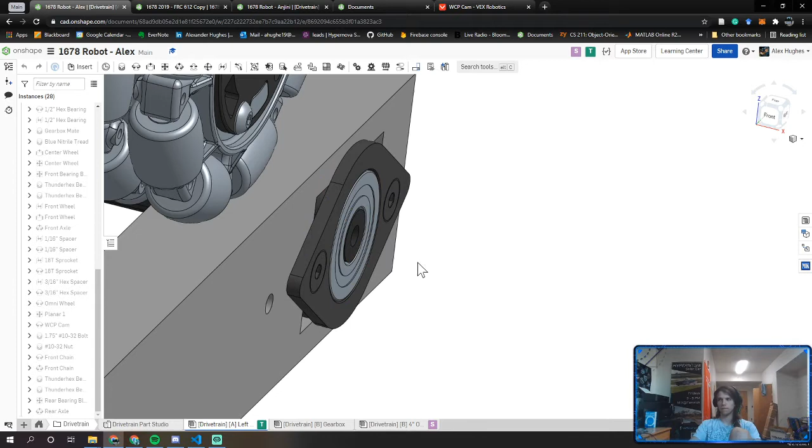So I'm going to do a cylindrical mate. I think that's what I did previously. If not, this is definitely what it should be. Cylindrical mate and rename that rear axle. Okay, now we have a cylindrical mate. Mating's weird in Onshape. Okay, so we have the shaft in place.

And then I'm gonna put my 3/16 inch hex spacer down here at the bottom. That's not how I want to do it. I want to do it a 2-part mate. First, doing a planar mate. We've always done this with these hex parts: do a planar mate so you don't have any interference between your hex patterns and your hex shaft. Name that 3/16 inch hex spacer. That's what it is.

And I'm going to do a revolute mate between that and the bearing, which technically isn't correct because you're not pinning it to the bearing, but that's how it goes sometimes. Actually, it should be a planar mate, not a revolute. My bad. Sorry, Onshape. You don't need to get that mad at me. No, not a planar mate. What am I doing? It's a parallel mate. Is it? How did I do this previously? I had it as a revolute mate, so why is it getting mad at me now?

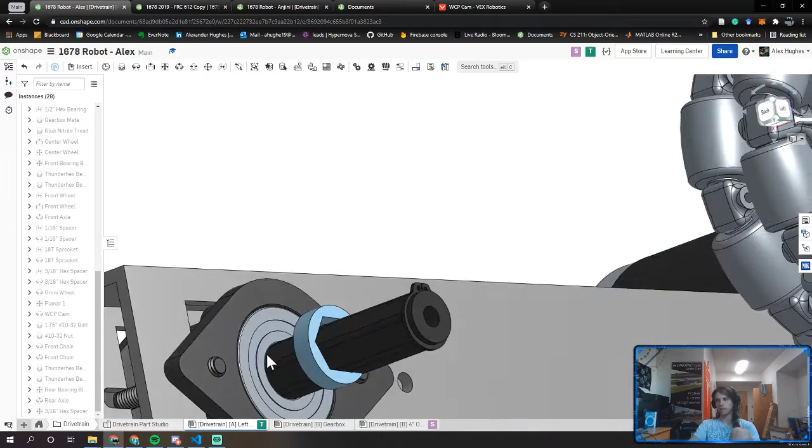Onshape is upset about something I'm doing, and I'm not quite sure what it is. This entire project has just been great practice for my Onshape mates that I rarely ever use. That's what I'm really getting out of this. Maybe a cylindrical mate would be less annoyed. Nope, still doesn't like it. Weird. Sorry, I'm just trying to figure out what the most efficient method for this is while you all catch up.

Rear axle, I did a 2-part mate, slider and a something. Oh, I only have a cylindrical. I do a revolute mate between you, then I do a parallel mate to you. That was a slider mate, not a revolute mate. Okay, there it works. Sometimes the order of your mates causes issues that I don't fully comprehend, but you know, with practice comes perfection.

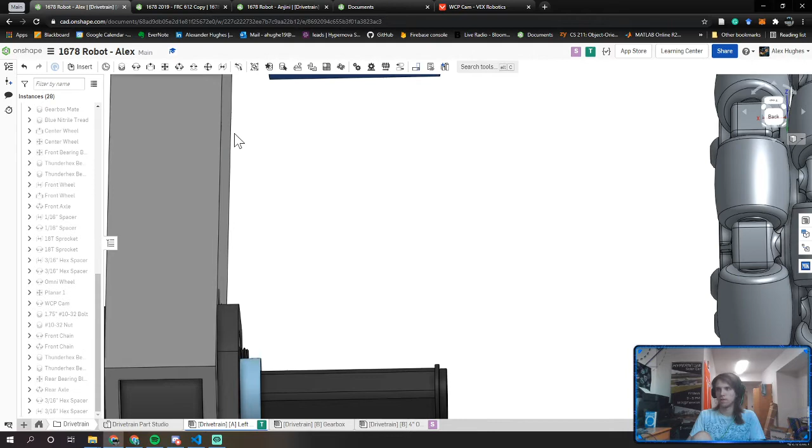So now that we have our spacer on there, I'm just gonna go ahead and throw on our wheel, and that's gonna be a simple revolute mate as well. Now, start with the parallel mate. Then do the revolute mate. Okay, cool. These 2-part mates are kind of annoying, but it gives you a better result in the end. If you look at StealthBot, everything was just a fasten mate, basically, which technically isn't correct, so now that we are doing our mates correctly, everything comes out nicer.

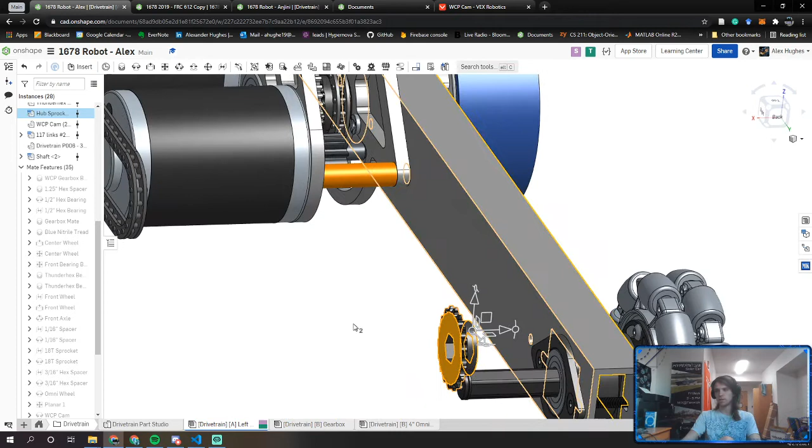Okay, so now I'm not going to worry about retaining the shaft just yet. Now I need to put the sprocket on, and I need a new spacer. So I need a spacer that is 1/16 of an inch plus the width of the sprocket, because we are going to be running a chain on this rear sprocket. So we are 1 sprocket over from the beginning. So we need 1/16 of an inch plus, what was this? 0.361 inches.

I'm going to go back into the Onshape Part Studio, do the same thing that we've done several times now, which is make a hex spacer, 0.505. Outer diameter is going to be 0.75. I'm going to do some math: a 16th plus that, and it comes out to 0.424. Obviously, I need to rename this. I'm going to throw those both in a folder. Sorry, that is not part 6, that is part 7. Rename this to the proper component, drivetrain part 007, 0.424 inch hex spacer.

Then I want to change its material to PLA, so anyone who pulls this up will know that this is a 3D printed part. They can print it. If you don't assign the material, someone might think, oh, this is an aluminum spacer, and I have to make it on the lathe. No, super simple. Just 3D print it.

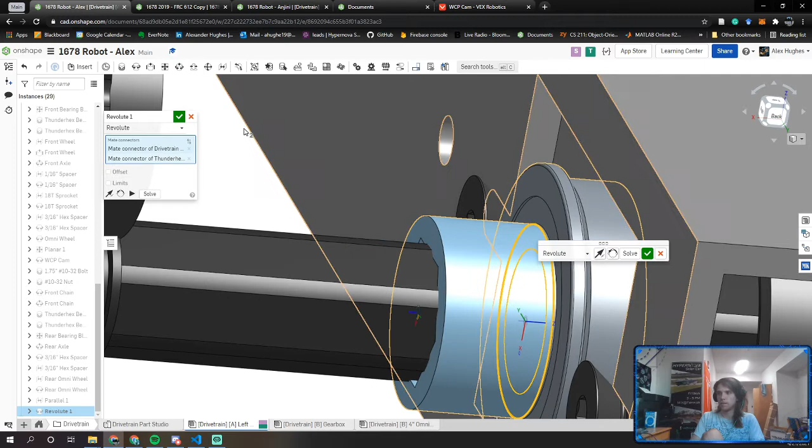Obviously, we need to go in here, insert that, and we're just gonna insert that like how we insert all of our other hex spacers. Planar mate onto one of the flat surfaces here. It's stuck in the middle, so I need to hide that. Out over here. Revolute mate between this and the bearing. Bring all parts back. Rename my instances.

And do my sprocket. Sprocket. Let's give you the rear. Specify that this is the rear sprocket. Just in case I need to go back in here and troubleshoot mates at a later point, I'll know which sprocket is which mate. Coolio.

So final thing to do is to define the shaft. So I'm going to do a revolute mate from the end of the shaft, effective end, to the sprocket. It's going to be rear axle. Yeah, rear axle. That did not like that, apparently. What did I use for the last one? I used a planar mate because that has more freedoms associated to it. Yep. And then we just need to shorten this axle again.

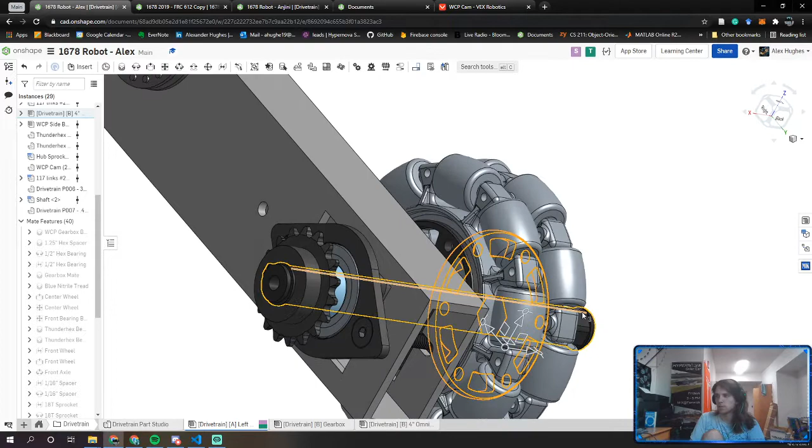So I'm going to get the distance of the effective length, which in our case is 1.4205. So I'm going to change the configuration. So I'm going to do in parentheses 5 minus that number. Then I'm going to add 5/1000ths of an inch, and I'm just going to change that. Remove the 5/1000th of an inch we would otherwise subtract. So it's 5 minus 1.420 in parentheses. So it's going to be a 3.58 inch shaft. Generate. I'm going to hit OK. That shaft fits on there perfectly.

And that's basically it. Now we just have a cam. Quickly add that in. Let's go to WCP cam. Need the screw that it came with, so I just copy those over here. Screw. We also need the nut that it came with that we inserted previously. Insert the screw. If we remember, that is a 10-32 1.75 inch bolt.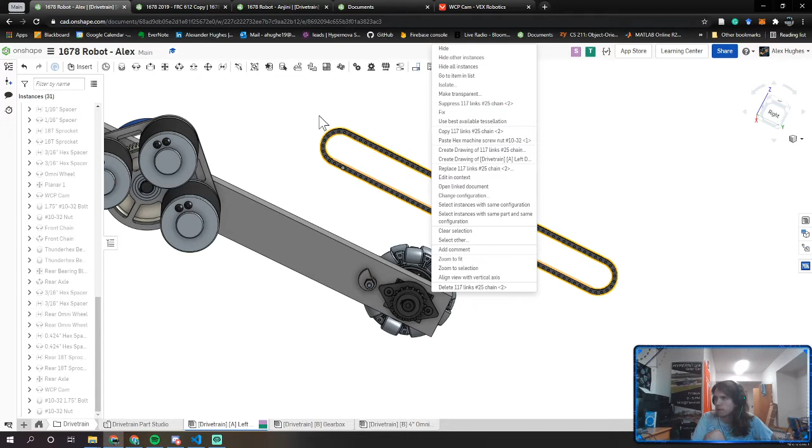And then we add the #10-32 nut. Then finally, we add the chain. The chain is not showing its mates, so I want to show. I do this. Should be a thing that allows me to show its mating point. I could also just hit K. That's kind of... ugh.

Okay, we're gonna do this the way we previously did it, which was just go into MKCAD and get a shaft, or not shaft, chain. Chain configurable. Aiden said it was 12.4125. Realistic model. For some reason it doesn't like inserting that. Why? Okay, insert a simplified one and then change it to realistic. Cool. Right click, change configuration, realistic. There we go. Generate. So that makes me happy.

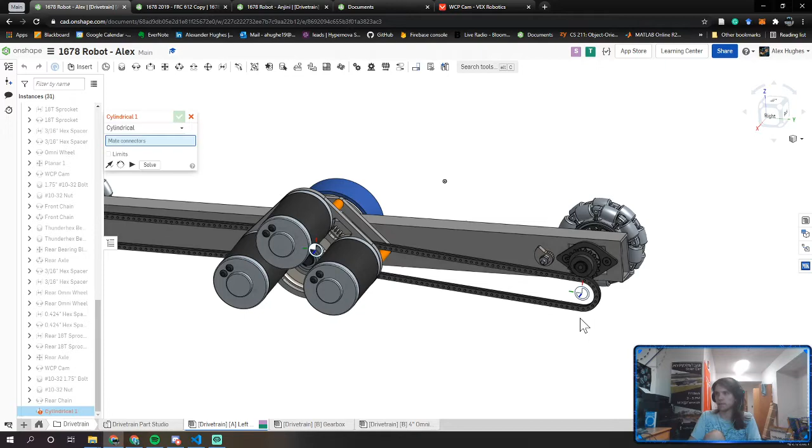I'm going to do a revolute mate, that mate connector, and inside of this sprocket face here, I obviously need to offset it by about, what was it, 0.05 inches. You do it in the other direction for 0.05 inches. Yeah, that looks good. To rear chain. Now you should be a cylindrical mate because I need it to both rotate and move back and forth so it fits perfectly. No little minor errors that could get in the way. Also rename you to rear chain.

We have an error. Interesting. What's happening here? Our sprocket on this rear chain is not at all lined up with our sprocket over here. So what could be the issue? I see the issue. I mounted the sprocket the wrong way. This sprocket should be flipped backwards. So luckily, since I named all of my mates, it should be easy to go in and fix that. I'm looking for sprocket, 18-tooth sprocket. Here we are. Revolute mate.

I want to change the mate connector on the hub sprocket from that front face, this one, to this rear face. I want to hit solve. I'll flip it around. Solve again. Came up with a bunch of errors. Easiest way to fix this is to just delete. I'm also going to delete this chain one so it doesn't get too mad at me. Move the chain out of the way. Just could delete both of these hub sprockets. Mate is the other one. Okay, round 2.

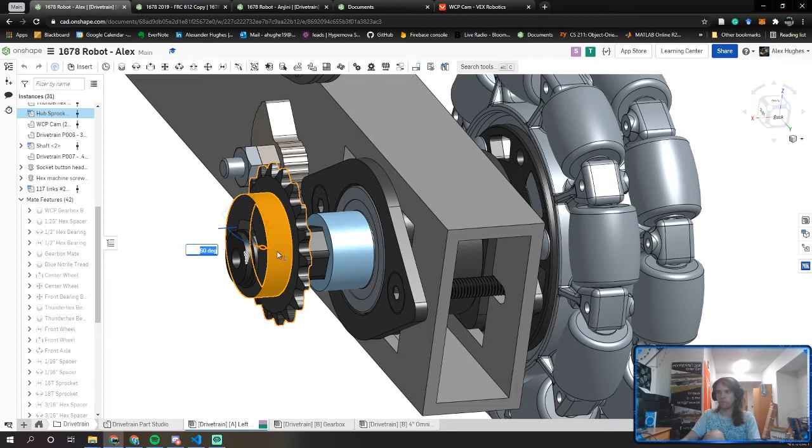What the heck? Why is it still following me? I am confused. Show mates. Oh, the rear axle is pinned to that. Suppress you for a moment. Suppress tool, pretty neat feature. Allows you to fix things temporarily and then go back in and fix them again later. So again, I'm going to remate the sprocket. There's probably a much more efficient way of doing this.

I'm just going to do one flat edge, another flat edge, rear 18-tooth sprocket, out, revolute mate, the back end of you to front of you. Again, here, 18-tooth sprocket. I'm going to unsuppress this, and it should give me an error. Yes. Just want to make sure it is now going to the front here.

Hide. Now my sprockets should line up perfectly, which they do. Finally, I can add the final cylindrical mate between this mate connector and this guy. And this again will be named rear chain. Let's drag those two chains together, so if I ever need to find them, they're both in the same place.

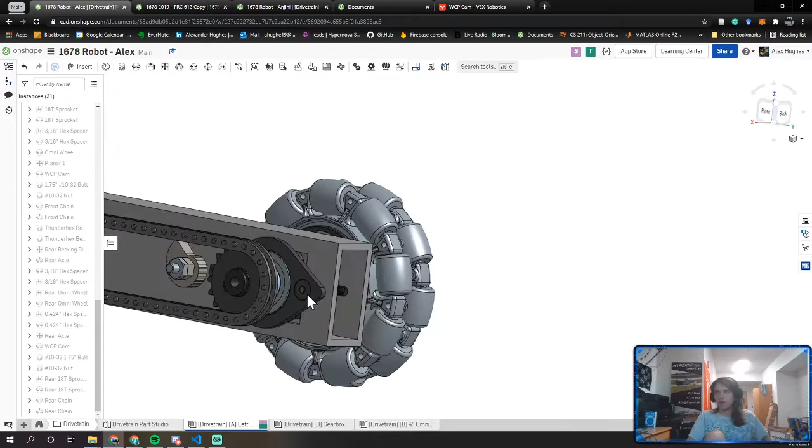Okay, so that was fast. Kinda talked a lot. Kinda didn't pause to ask questions. But now, as you all see, we have a completed drive rail. So this entire left side assembly, effectively half of our drivetrain, is now complete. I will pause for any questions.

So this is like unrelated to the CAD, but why are all or almost all of the bolt heads on the rail facing the inside of the bot? Is there a reason for that? Not particularly. I mean, it kind of depends. You want to make some of these things easy to access. So it might actually be worth it for me to put this bolt head on the outside of this cam, for instance, because if I need to take the cam off, I don't necessarily want to take the entire wheel off. But currently, the only way I can access this screw is by taking this wheel off.

So you kind of just have to think about it in terms of ease of build, ease of manufacturing. You also have to think about it in terms of: are you going to get interferences somewhere? So one of my fears and one of the things we might have to fix here with this wheel is actually flipping the wheel around so the bolt heads are on the outside. Here you have almost a 1/4 of an inch worth of stick out. While with a bolt head you're getting half of that, less than half. So this might actually end up interfering with our bumpers. So we will need a wider bumper assembly. And if our bumpers go over spec, then we're going to run into issues.

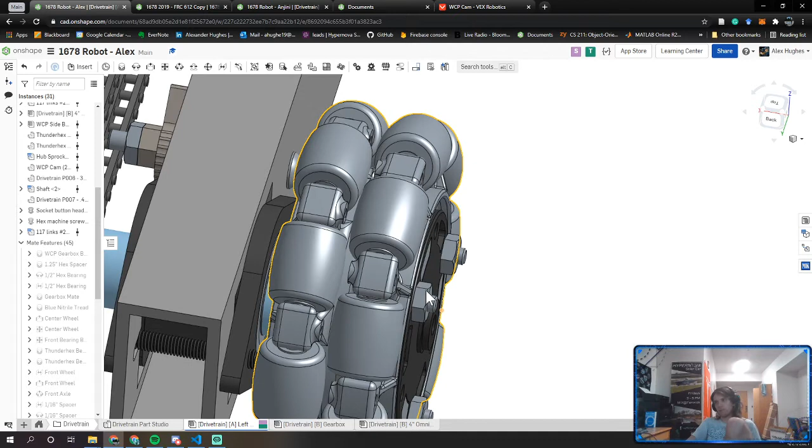That was something that Rosie had problems with, is we would put bolt heads on the outside of the frame and they would interfere with our bumpers. I had to yell at students about that. So part of the reason we always CAD in our bolts is to make sure that we never run into those interference issues. Like here. If you didn't CAD in this bolt, you never would have known that that would have interfered with the drive rail and you needed extra CNC holes in order to access that. Or in Anjini's case with the non-pocketed gear, you might not have noticed that your bolt would interfere with it otherwise. Other questions?

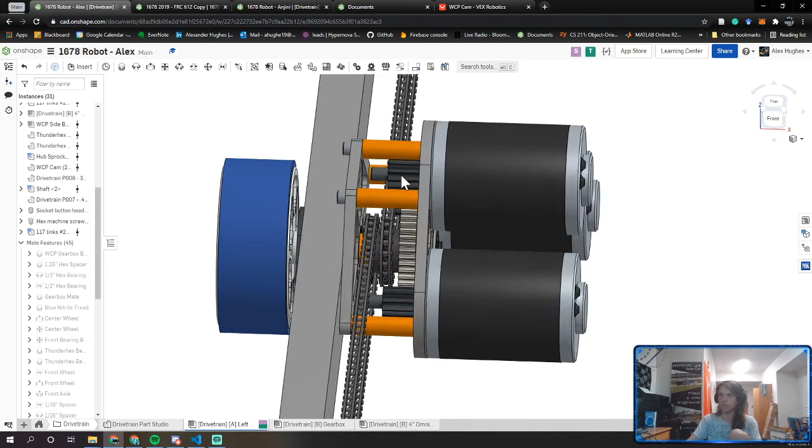The great thing is, next time, all that we need to do is we're going to duplicate this assembly. Actually, we could go ahead and do that now, I think. But basically, we're going to duplicate the assembly and then switch around the chains. So your inner chain should always go to your front wheel, and your outer chain should always go to your back wheel. Actually, I don't think that matters at all. Maybe we'll just rename this to drive rail and have both drive rails be identical. Sometimes you do need to worry about your opposites being inverted. But in this case, I don't really see the difference between left drive rail and right drive rail.

Is there a way to just mirror everything? No. I wish there was, but there's not. What we can just do is we can now duplicate this drive rail. So now I have a copy. So what I could do, I could just rename this right drive rail. And now I could just go in, find my chain mates, and delete them. Like here, rear chain. Actually, I can't really do that. I need to swap around the spacers as well, because technically we're swapping the front and the back wheels whenever you invert anything. But we will worry about that next time. Basically, like that. Up around 180.

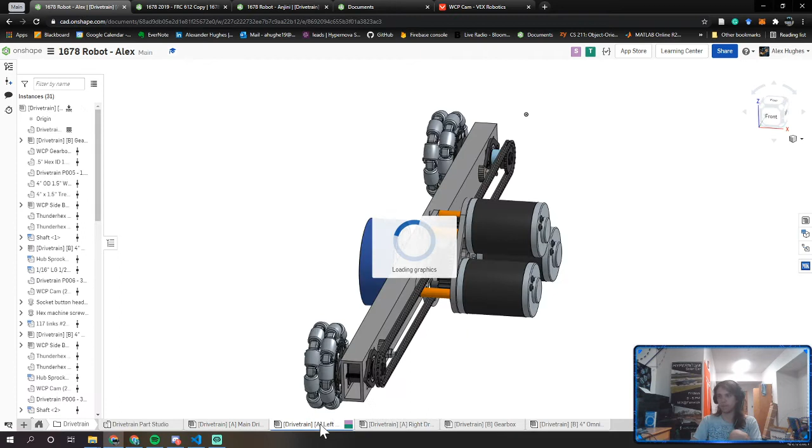So this we now know is going to be an A level assembly. We could just call this main drivetrain assembly. And inside this assembly, our left and right drive rails can go. So we now need to demote these left and right drive rails to B level assemblies, because now there is an assembly that is higher level than both of these. And now our gearbox assembly, because that's a part of a B level assembly, is actually going to be demoted to a C level assembly. Same thing with these Omni wheels. That's going to be demoted to a C level assembly.

So realistically, I should have done this planning more at the beginning, so I wouldn't actually have to go in and rename all those, but it's not a big issue. So now I know I'm in an A level assembly, so I should only really be inserting B level assemblies here. There we have it. Now we have two drivetrain rails. And you know what? Let's go ahead and finish up the drivetrain today. All we need now is 2 bars. We can worry about adding gussets and other things next time. Let's just go ahead and finish that up.

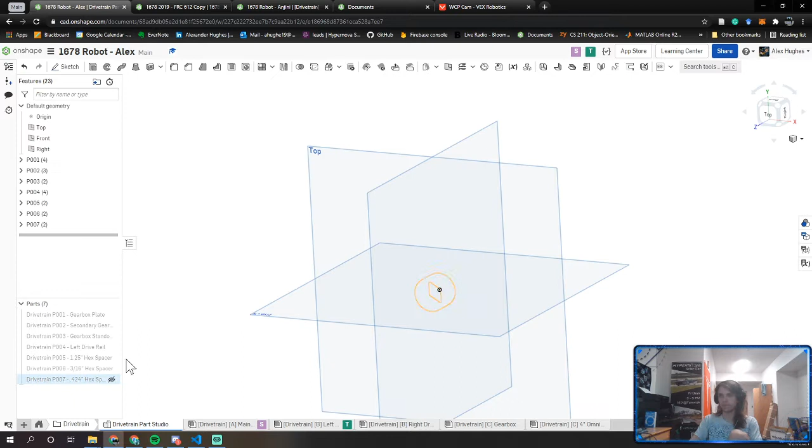So all we need is a front bar that is 25.5 inches long, and the rear bar looks identical. They both have the same hole profile to them. My Onshape froze? Oh, okay, it's back. So I think their front and rear bars are identical. Oh my god, what did I do? Oh, I opened bumpers. So let's just go ahead and make a front and rear drive rail. In the spirit of good practice, I'll make the front and rear different because typically they'll have different mounting holes, but they might, for all intents and purposes, be the same in 1678's robot.

So I'm going to create a 2x1 rectangle. I'm going to use the offset tool. I'm going to offset inwards by 1/8 of an inch because we use 1/8 of an inch metal for drivetrain applications typically. So I want to extrude that by 25.5 inches. I'm going to rename that to drivetrain part 008 front drive rail.

Now one thing that I'm going to use, I showed this off last week I think, is the feature script for tube converter. This is available on Chief Delphi under Julia's feature scripts. If you add that to your workspace, I think I also linked it in Discord from last week. But if you click on that feature script and you click on your part and you go to 1678 style, you can add in all these holes just like how 1678 has it.

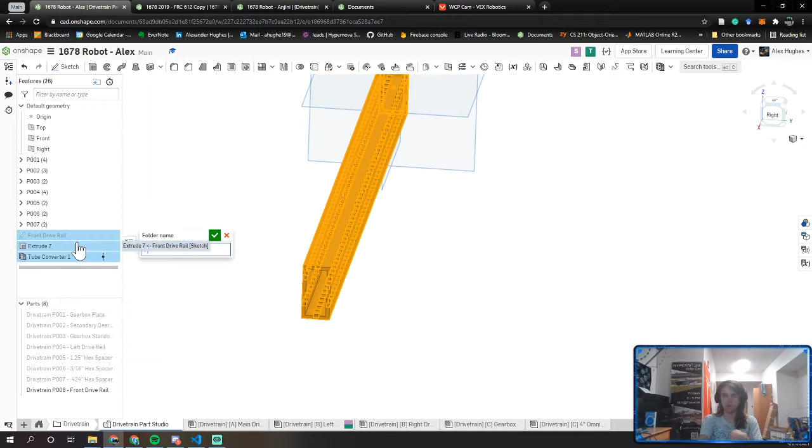Throw those both into a folder. And then we're going to make an identical bar for the time being. This might have to change later, but for right now, they're going to be identical. Again, 2x1 bar, offset inside. So I have now an eighth of an inch, not a seventh of an inch, eighth of an inch. The rear drive rail profile, extrude 25.5 inches. Again, use the tube converter, 1678 style. Everything stays the same.

Rename drivetrain part 009, rear drive rail. Throw those into a folder. Add our material. And make it look cool. So now, very quickly, I'm going to go into our part studio and I'm going to insert the front drive rail up here at the front, the rear drive rail here at the end.

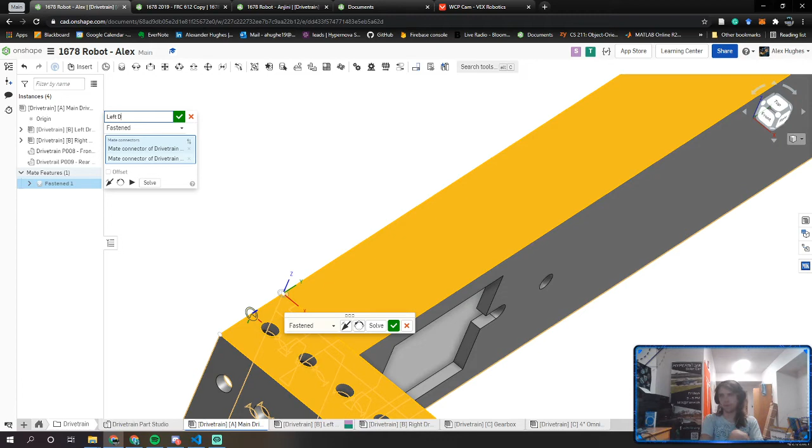And I'm going to very quickly mate these together. And I could just do simple fasten mates for this, I think. Just kind of mate them by the corners. I can rename this left drive rail. Mate this again. Right drive rail to the front. I'm going to mate the rear drive rail. Up, there. There we go.

And there you have it. Now that you all have this assembly, you have created your very first West Coast drive in your own CAD file. So congratulations.

There's some minor tweaks that we still need to add. We have to add a bunch of holes to the left and right drive rails, add gussets, and add a belly pan.

But for the most part, this is something that you could go out and physically build, and mechanically it is sound. It is identical to what 1678 built in 2019. So this thing is pretty cool.

I don't think we'll bother adding the bumpers or bumper attachments. No one likes CADing bumpers, so we're not gonna bother with that.

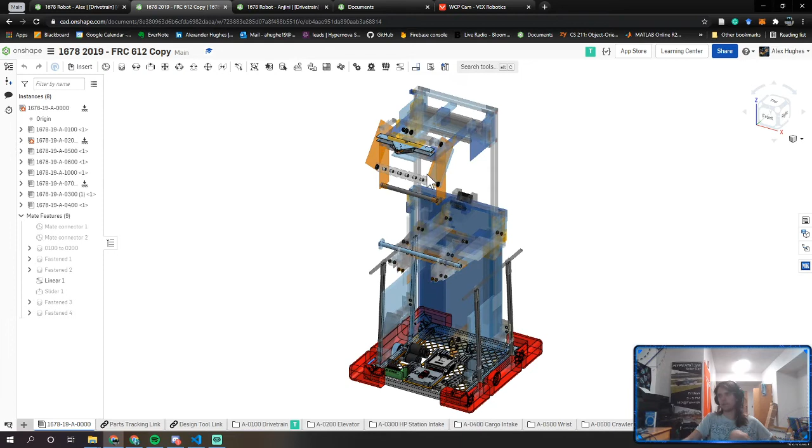Next time we will finish up the drivetrain. We'll probably make a belly pan, potentially add in some electronics, and we'll definitely do the gussets. But what I want to start getting onto is the bigger stuff on this robot, the elevator and the mechanisms that mount onto it, like this intake, this other intake, all this stuff on 1678's robot that I don't yet understand.

There's a lot of cool stuff coming up. We'll also start moving a little bit faster on the elevator stuff now that you all have a good understanding of how this CAD process works.

Any questions before we wrap up for today? I don't know if you care or not, but your mate is called Rain instead of Rail. I do care, thank you. Rail, there we go. Other questions?

Why did you create two of the front rails if they're identical? Because you might have to customize one or the other in the future. For example, on Rosie, the battery was mounted to the rear rail, so we needed separate holes in the model that weren't on the front rail. Just good practice.

Or we could just do the easy fix and just drill it into the battery. Come on. Oh yeah, obviously. Of course.